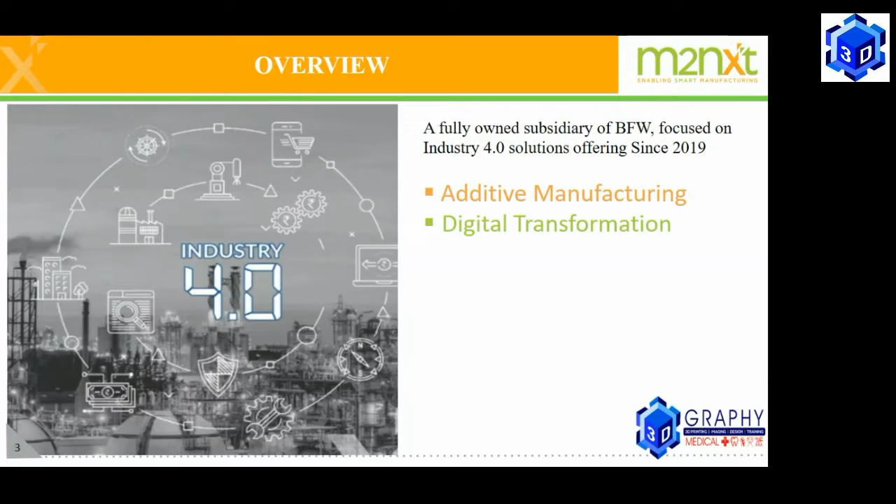At one point we wanted to start offering factory automation products. That is how M2NXT was born, which is Industry 4.0, where we have four verticals. The first vertical is additive manufacturing based on laser-based DED. We also have digital transformation, where we can acquire data and do analytics on every piece of equipment being produced and running on any shop floor. We also do a lot of automation in terms of how equipment runs on the shop floor.

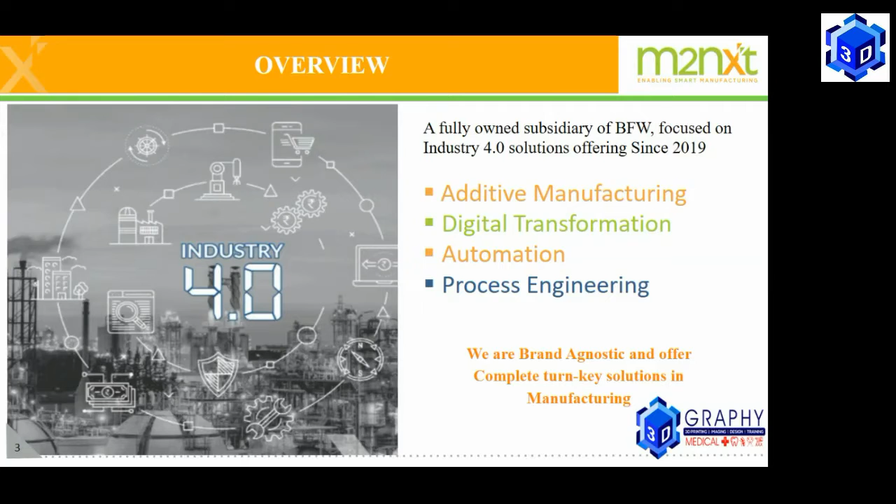We use robots, cobots, and so on. We also do process engineering, which brings better efficiency in terms of how we get the best out of the equipment at the end of the day. We are primarily brand agnostic and offer complete turnkey solutions in manufacturing. That is how the entire journey of M2NXT is going to be.

Now, on the portfolio, I'd like to emphasize two areas. One is AGV automation, which can be a good solution for medical requirements. We're already working on pharmacy and clean room applications. So on the medical domain, we can look at AGV, and particularly on additive, we have hybrid and 3D printing solutions.

In hybrid, you can build the part to the required contour and finish the part without removing it from the machine, which means you can achieve micron-level surface finish along with the contour. This has 5-axis capability, with 3 linear axes and 2 rotary axes, which I'll show you a little later.

Along with that, if there are very crucial contours, we can use robotic additive. We can also use gantry additive, where the voluminous part, which can be as big as 2 meters by 2.6 meters, can be built on a gantry. So this is the brief portfolio.

Now, what is the significance of additive in the medical domain? What can we offer? First, this is a made in India product which we have launched. We look at how it can be made affordable in the country, particularly in the medical domain, and it's used for creation of customized patient-specific prosthetics, inserts and anatomical models, health restorative items and hardware.

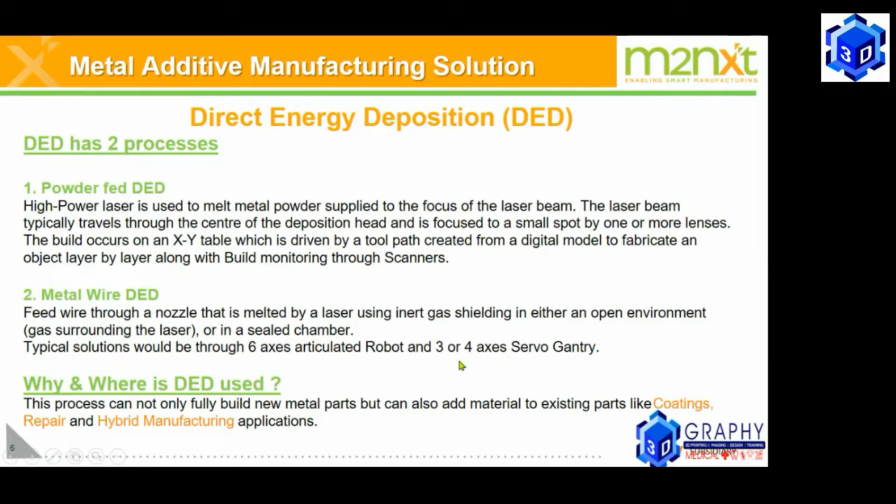So where DED is used is coatings, repair, hybrid manufacturing, and so forth. We can bring both chambers, open chamber and closed chamber, which we can supply along with the equipment, depending upon the quality of the part which needs to be achieved after we build and machine. So it can be an open atmosphere or a closed atmosphere, with a shroud gas which could be good enough to build the part.

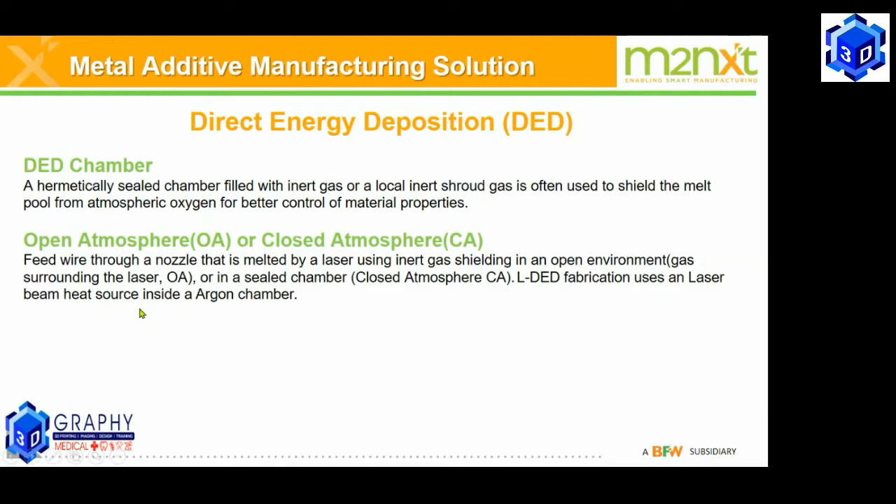Now let us look at the platform called Photon H series, which we have launched and which is up and running in our technology center here in Bangalore at BFW. This comes with an additive and a subtractive capability. As you can see on your right, when you are building the part, the head comes down and the part starts getting built on the table.

Once this part gets completed, you can see the subtractive spindle next to the part with a center distance, where the offset is automatically taken by the machine, and the CNC will take over the machining of the part. This means you build the part and complete it with machining on the same table. The entire system has the CNC controller on the right and the additive control on the left.

The building and machining is seamless, which means we use a post processor and a CAM model, we get the STL file, we build the part, and with suitable offsets of the tool, the tool changer automatically selects the tool and then machines the part.

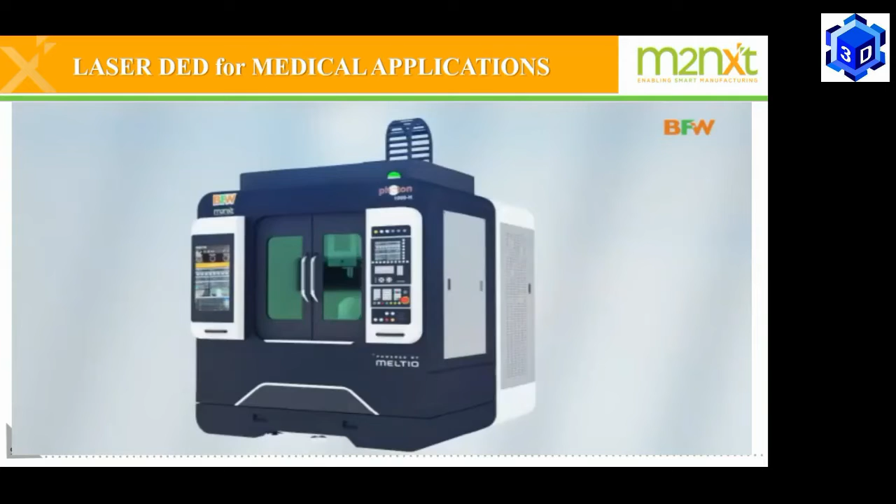So just to get a better view of the product, I will run a video which gives an exploded view to show how the machine looks. This is how the complete machine looks, good to go on any shop floor or laboratory. It's an industrial level machine with laser safety glass in the front, and you can see the VMC with 5 axis, with 2 rotary tables and 3 linear axis.

Depending upon the contour and the volume, you could build the part by programming on a post processor.

This is the laser head which comes down when it wants to do an additive process, then goes back, and the same table moves towards the mechanical spindle, which can machine and finish the component. On the right you see the CNC controller, and on the left you see the additive controller.

Here you could build the part based on any contour required, finish the part and take it out, and go to any platform depending upon the requirement. The 1000 platform gives you something like a 400 by 300 by 300 kind of volume, which is good enough for medical implants.

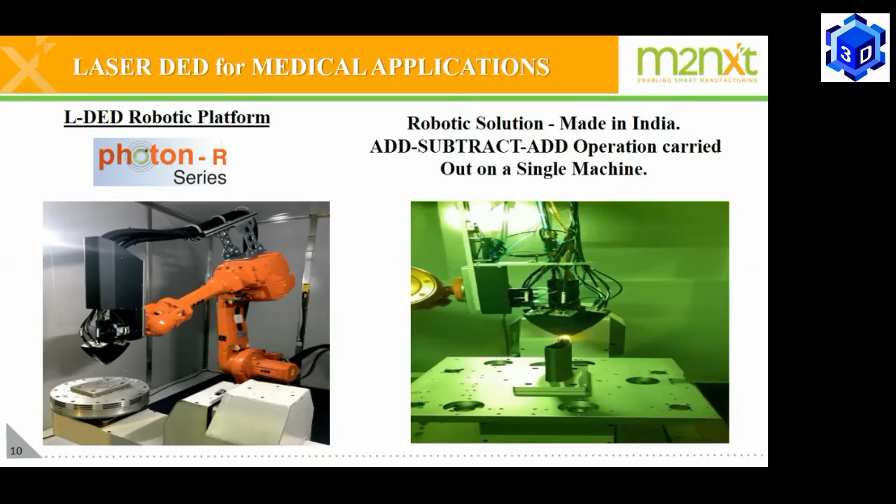Now, various parts which can be printed using the application - I will not get into the details - but typically the jaw implant, the surgical guides, the femoral stem, the skull cranial, hip cups, leg prosthetics and so on can be achieved using this particular platform which I just showed you.

Primarily, it is customization and personalization with superior finish. This is something which, on a single setup, without the intervention of anybody after you build the part, is the advantage. Optimal cost efficiency, because we are building the machine here with the complete post process, including the CAM model software. Enhanced productivity with versatile finishing capability, democratization and collaboration, wide variety of materials.

You can go in for a combination of wire and powder to enhance adaptation of DED technology, which means the wire is chosen when you want a very fast build rate. Imagine you want to build a part within 1 or 2 hours, the wire would be the right thing to do. And when you want a fine contour of the part, powder would be used. So the combination of both gives you accuracy as well as speed in terms of the platform.

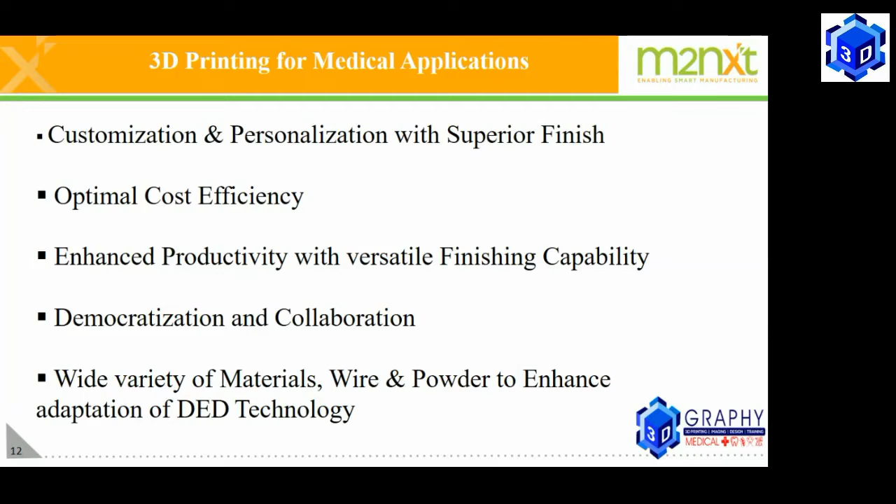And the hybrid would enable you to go and finish the part and be ready with respect to the implant, which would be the required thing for the patient.

Typical applications of LDED in medical are most commonly patient-specific orthopedic implants, patient-specific surgical guides, mini plates for free flap fixation, customized prosthetics, and coating on top of implants to enhance application and life of patient.

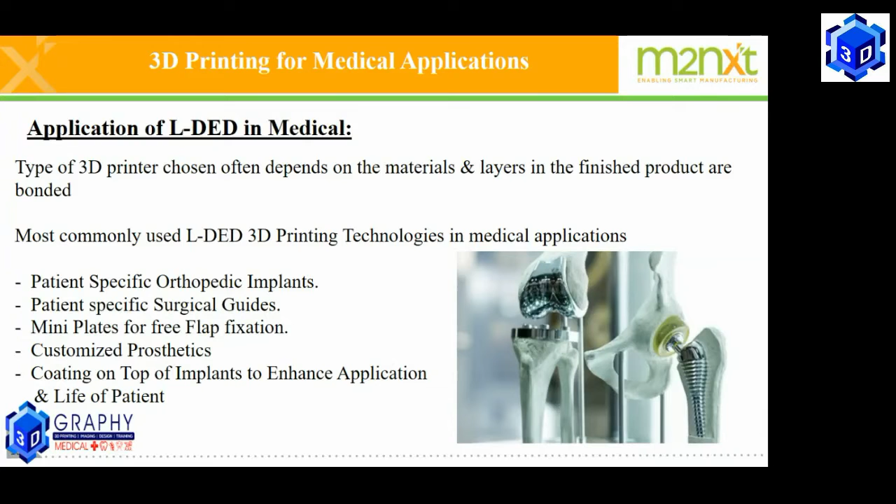We also have a coating capability where we can use a third nozzle on the machine itself, where instead of doing an additive, you can do a fine spray coating of the powder, which would bring in the longevity of the implant itself because of surface coating.

Finally, looking ahead, the most advanced 3D printing solution is anticipated for complex implants. In situ printing, in which implants are printed just before surgery, is anticipated as a future trend, where a patient would require quick attention because of various issues, where the surgery has to happen instantaneously, and a patient-specific implant can be printed at site.

This will advance to use for in situ repair of partially damaged, diseased, and fractured bones. This is also a possibility we are looking at.

So finally, I want to conclude that LDED additive solutions can realize implants to the finest contour with a versatile metal range, starting from stainless steel to titanium to chromium cobalt to vanadium, and so on, to suit every need from scan to implant, so that the surgeon or domain expert needs to do what he needs to do, while we try to support entirely from the local capability and see how much we can come closer to the orthopedic requirement.

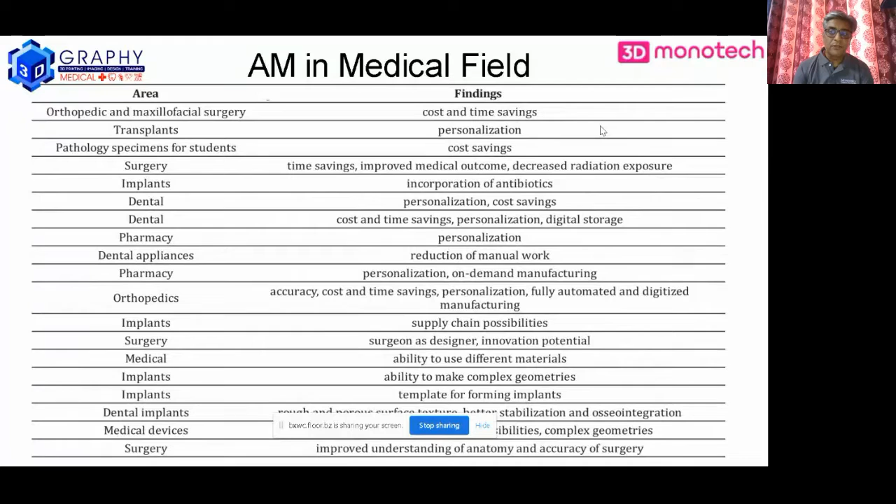This is what we are talking about today, more about orthopedics, how it can help, how additive manufacturing can help in all this. You can see we are only talking about a few areas like implants, which is mostly to do with metals. But there are also other technologies which can be used by doctors in the medical field for the favor of the industry and for themselves.

Some various basic applications in orthopedics we can talk about are testing and planning, where we can speed up the process in developing new devices, and also create some sort of models which can be used for better surgeries. We can also talk about implants and devices, which has been the main discussion throughout the last 2 days.

Talking about testing and planning, this is very important, because before even the planning of the surgery, if it's a very critical surgery, today with the digitization available, with the type of DICOM to print software available in the market, it's easy to digitize and convert patient-specific medical data into a digital 3D model, plan it properly, design it to the requirement of the patient, and manufacture it.

This is where additive manufacturing is very important for customized solutions, and inspection. You can put models through 3D systems, through intensive quality control systems, and deliver a final product.

Models, guides, or implants - the various technologies used for testing and planning could be right from the software. If you talk about hardware and 3D printing, we talk about metals, but there are many non-metal products useful for basic planning.

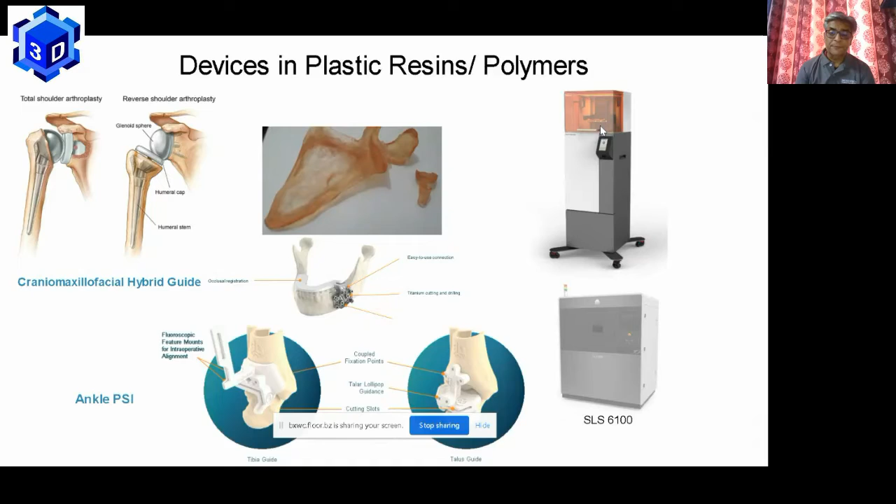Going forward, also with SLA technology, which is stereolithography technology, we can see that there are a lot of devices which can be printed with very good accuracy and finish, which can be part of the initial surgical planning and surgeries as well.

And then devices in metals, of course. When we talk about metals, it's very well known that titanium and stainless steel are being used for devices and shoulder implants, interbody fusion cages with inserters, and various hip implants.

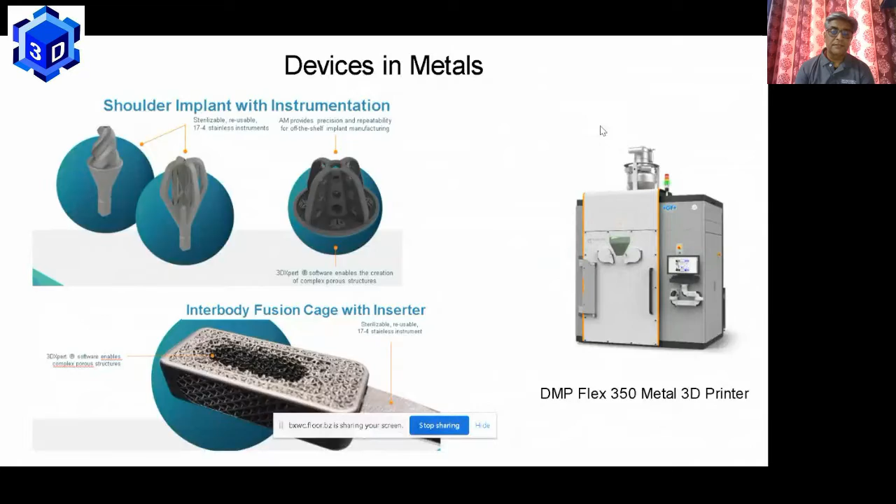There are a lot of materials available today with powder bed technology and also DED technology, which are really revolutionizing devices in the industry. And we talk about implants in metals - there is a whole lot of possibilities with 3D printing and metal 3D printers.

This is basically something which we can do with powder bed fusion, direct metal printing technology, where you can integrate a lot of details for osseointegration and for very, very minute parts.

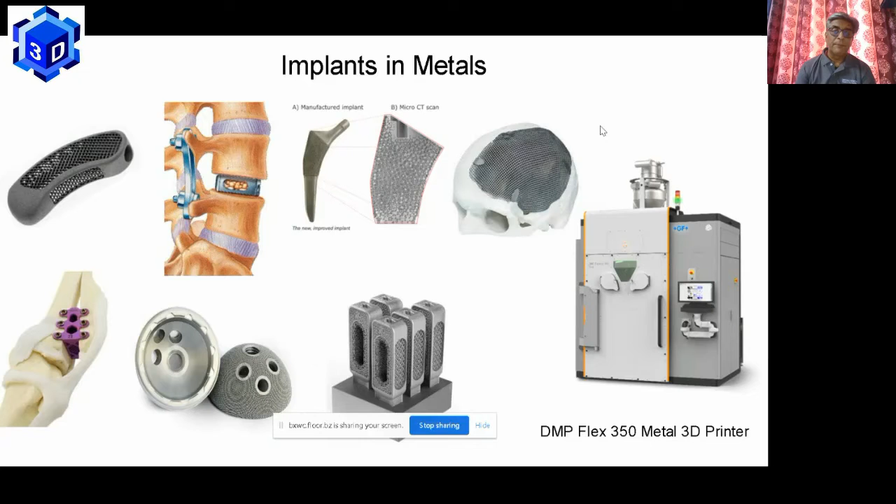For implants and devices, we always talk about metals, but there are also technologies utilizing ceramics and wax. Wax is also one of the important parts of medical manufacturing which we do not see, where it is going to be very low cost for certain surgical devices to be manufactured.

We also have wax 3D printing, through which a few components can be easily made out for investment casting. You do not have to go for molds or tools, which means it's toolless digital manufacturing using wax.

And then we talk about ceramics, which is a recent addition to our portfolio, and it's very important to consider this because this is going to be the future in terms of devices and implants.

And it is used as a probe to target cancer cells. This has been used for breast cancer surgery, manufactured using the XJet ceramic technology. This is one of the most recent technologies which uses nanoparticles instead of micron-level particles, and it can provide the minutest parts for surgical support.

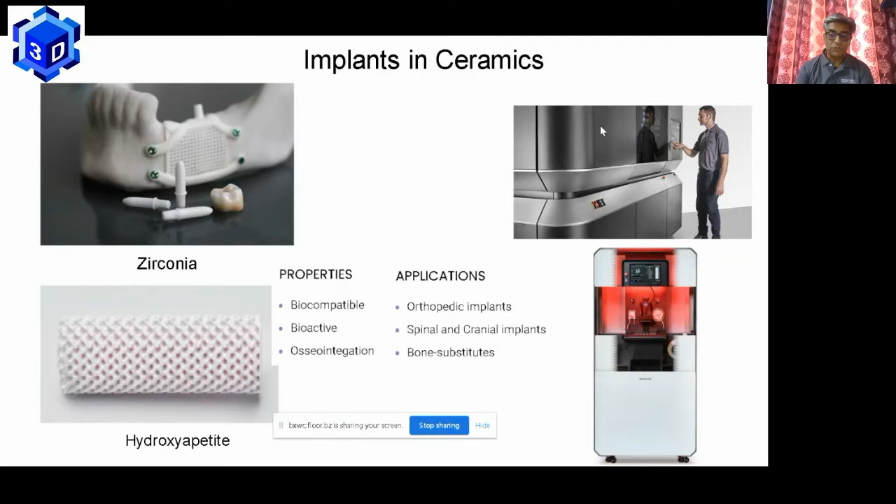Then we talk about implants in ceramics, which with zirconia and hydroxyapatite is being widely utilized today. Hydroxyapatite is also being developed through DLP technology for future implants. Zirconia is used right now for dental applications, but will also get into orthopedics in the future. With this, I would like to show you two videos on ceramic applications, showing how this future is going to be with implants.

Trying to diagnose and deal with breast cancer. In the U.S. alone, 41,000 women will die this year of breast cancer, and 500,000 will die worldwide. This despite advances in 3D mammography and other technologies. In the U.S. alone, 1 in 8 women will be diagnosed with breast cancer in their lifetime.

Back in 2002, Marvel Medtech recognized the potential value of MRI for detecting and treating breast cancer. However, as we got into this, we realized there was even more potential value—the idea of using MRI to detect early stage, dangerous cancers that need to be found early and treated is groundbreaking. Realizing that MRI could guide minimally invasive treatment procedures, we needed to develop an MRI-compatible tool, for example a cryotherapy probe that could be used inside the bore of the scanner while doing imaging to guide it.

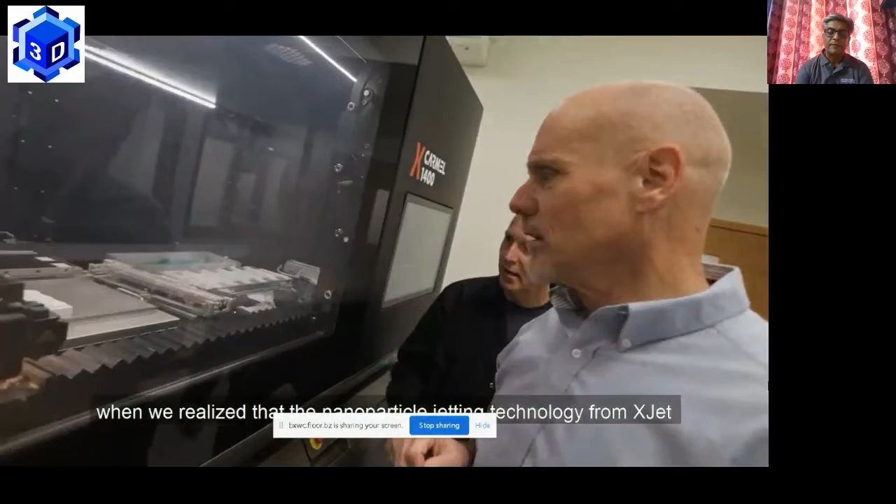A real breakthrough came when we realized that the nanoparticle jetting technology from XJet could meet our requirements for the fine, intricate details needed to make this MRI-compatible cryotherapy device. The XJet system offers freedom of design that allows us to produce this very complex part, as well as many others, with unparalleled ease of use. It's very efficient and environmentally friendly. It produces final parts that don't need any post-processing. The cleaning process is very easy and fast. It's now used for production parts that are ready to use, not just prototypes.

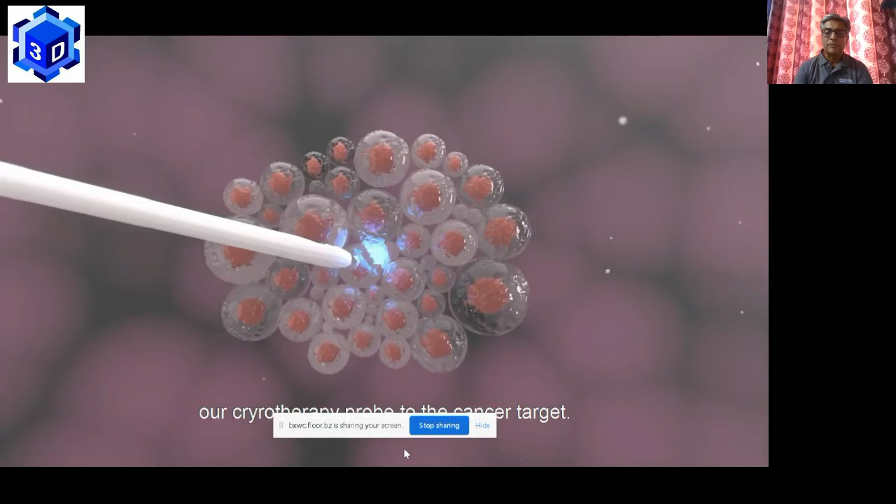So we use our image guidance system to guide our cryotherapy probe to the cancer target. We then apply the cryoablation technique that will freeze the breast cancer tumor, and we're done. We leave the tumor there after it's been destroyed, and the immune system cleans it up. Through this process, the immune system can actually generate antibodies that can prevent the cancer from coming back. This will transform breast cancer healthcare completely by eliminating the need for many biopsies, surgery, chemotherapy, and radiation treatment.

Our solution, combined with XJet's production technology, will be the new paradigm. This will allow us to offer groundbreaking treatment not only to patients in large hospitals, but also to those in community-based smaller hospitals. Our goal and vision is one day for women to go for an annual MRI screening, and if something suspicious is found, to be able to treat it preemptively. What enables this vision to work is the system from XJet, which allows us to produce the right probes that work in an MRI environment to treat these women and save lives.

Despite millions of dollars being spent on research trying to diagnose and deal with breast cancer, in the U.S. alone, 41,000 women were...

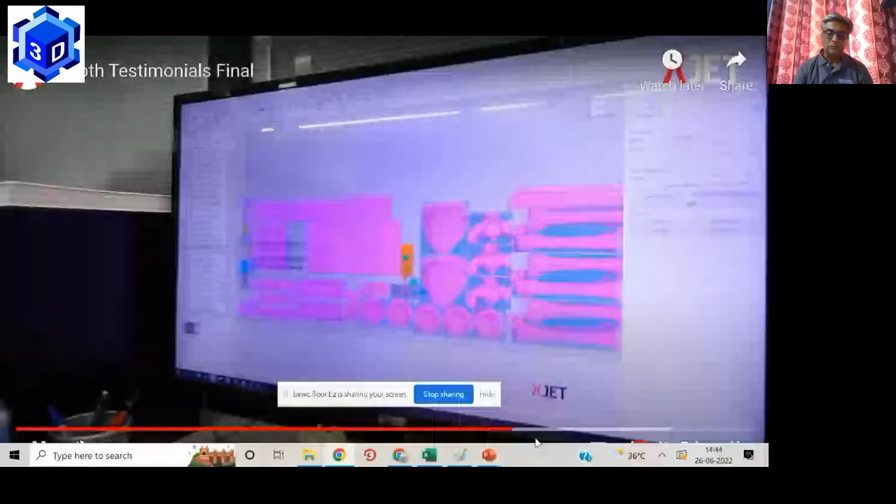About the parts, what we really like is the beauty resolution, the capability of doing a very complex geometry, small holes, very sharp corners, very refined surface finishes that you can basically make a part that's right off the printer, doesn't need any post-processing, and is ready to use, ready for the final use, ready to go in the field and be a valuable part of the customer.

Now, not only can you make it, now you can mass produce it. With our system, you can do your product development on the exact same equipment that you're going to go into production with, and it drastically reduces product development timelines and time to market. We want to be...

This company, Azot, is actually using the XJet technology for making parts for the Da Vinci robotic surgical instruments. This technology is being utilized very widely across the world. It uses nanoparticle jetting technology, and this is one of the futures for the industry, with very micro and small surgical parts and surgical devices using ceramic and metals.

So I would like to close with a few slides about us. We are basically a 23-year-old company, established in 1999 with 400 employees. Today we have 15 plus locations with 10 own brands, and we are also into the development of 3D printers.

Apart from our 2D printing capabilities, we have 27 alliance brands, out of which 9 are 3D printing technologies, all the leading technologies we have. We have 2 manufacturing facilities in Chennai and 1 in Delhi, and we have locations all over India to support our customers.

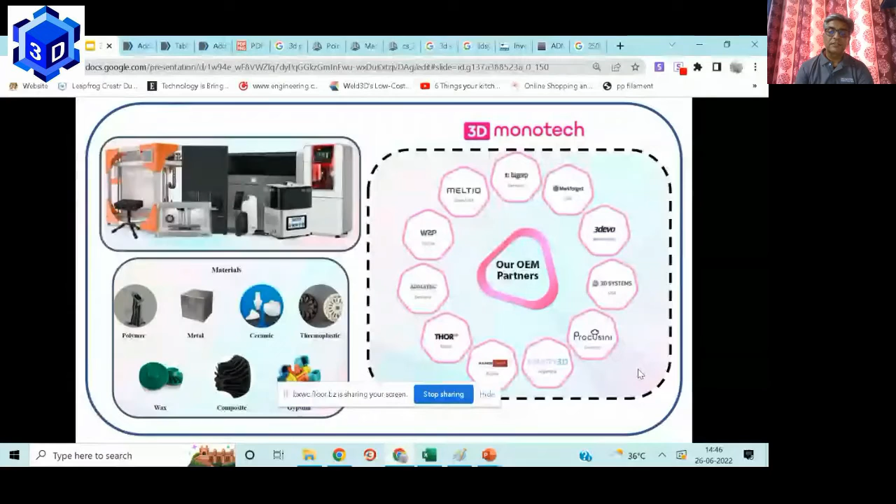Our partnership in 3D printing is with all the giants of the world with respect to technology, from scanning to printing of various materials, including wax, polymers, metals, and ceramics. So what we say is that we are not specialists in medical, but we have the technologies and at least the know-how to understand which technology can go for which application in the medical industry, and we are able to provide customized solutions which can help the medical industry.

I would like to conclude by saying that we are helping the medical industry choose the technology with respect to what applications they are looking at, and whether they have to go for print services or buy the 3D printers. So we give a complete consultation. And with 3D printing, we also work on the design flexibility and the economics of printing with respect to the applications.

The value drivers are we reduce manufacturing costs using additive manufacturing, with faster time to market and improved manufacturing and supply chain. We have around 19 technologies in our facility in Chennai, and we have the complete set of technologies across all the materials which we could use for the industry.

And we are also catering to the industry as well as the medical industry. I would like to stop here. Thank you very much for giving me this opportunity, and I hope these technologies could be utilized by the medical industry. Thank you very much.

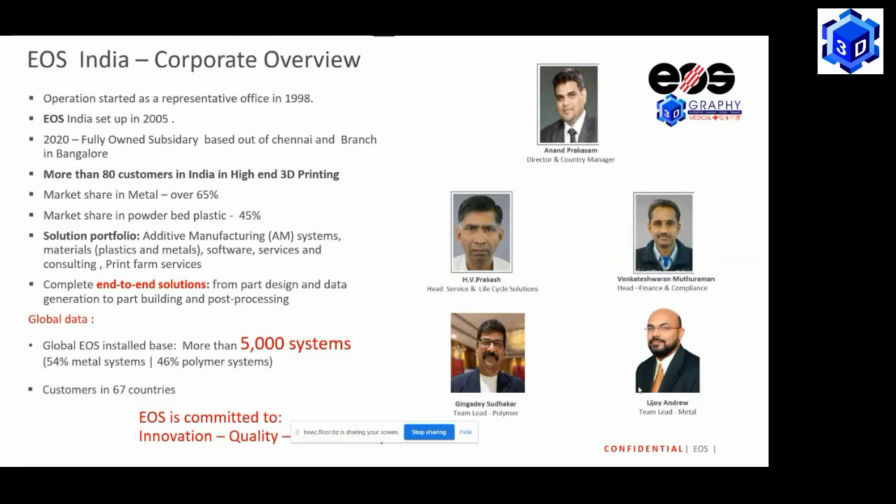So I'll tell you why I'm talking about that - it's called an end-to-end solution, in the later part of my slides. I'm going to talk more about the DMLS technology, which is called the direct metal laser sintering process, or the laser solidification process. It is a powder-based technology. EOS technology is basically only on powders. We don't do anything other than powder-based.

So how does it work? Right from a powder, you get the parts printed, and then you get the final product. You get the powder from one side, and there's a bed in the center, and on the left hand side you have a collector bin. There's a recoater which moves to your right and left. Once the recoater layers the powder, puts the layer, then you have the laser coming up and solidifies it, and then you get the part.

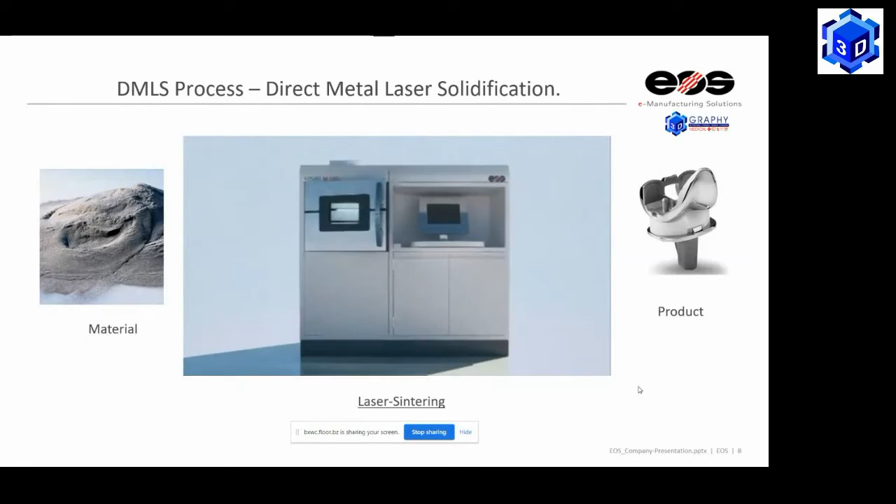I don't want to go too much deep into this, because I think from yesterday people have been talking more on this. So we are more into these areas that we have done. I've personally been working with the medical field from 2015, very closely with the medical field. Prior to that, we were not so much involved or active in this industry, but now we have been actively involved in these areas.

So we have materials. Whenever you have a process, whenever you're in the medical field or in the aerospace areas, the major problems are the materials - what kind of materials need to be used - because it goes into extensive testing and certification. So both fields are more on the testing and certification level. For that you need a very good process, for the materials as well as the process of part building. So here we have materials.

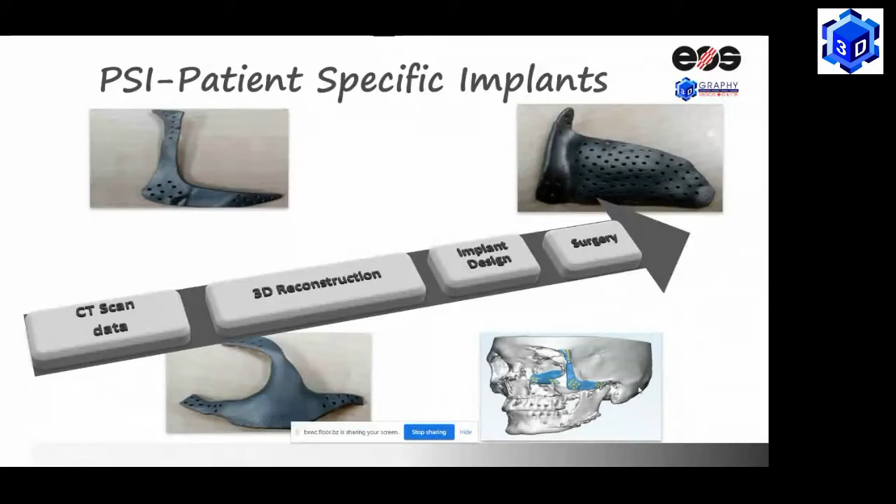On the non-metal side, you have PEEK, PA2200, and PA11, which are both used more on the orthopedic side. I just wanted to show you a few of our PSIs, which I was also a part of, right from the design level to the implanting stage. More on the cranial side, these are a few crania I think you people would have seen a lot of in these areas here. The major advantage here with us is the osteo integration.

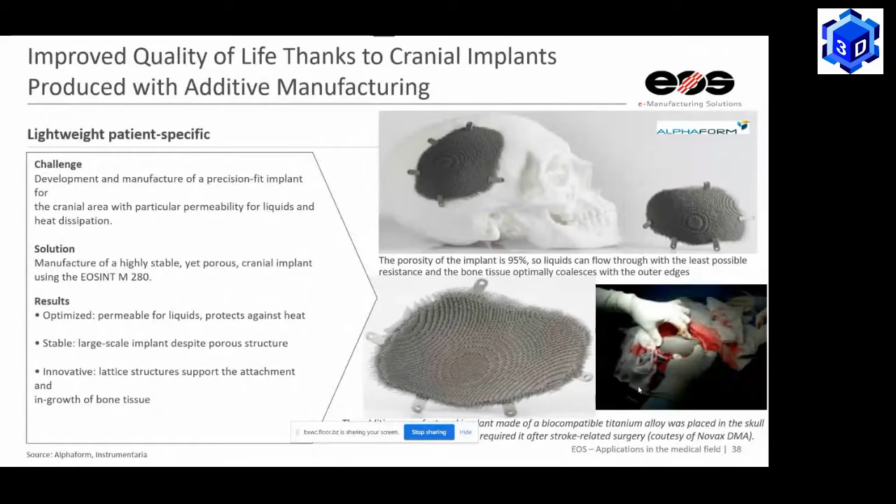For osteo integration, you have software which you can use, where you can control the porosity of these lattice structures. What I meant was, you can see the porosity here - that means you can increase it wherever you have acetabular cups where it's load bearing, or a knee, or wherever you have load bearing. When you do an analysis, you can increase or decrease the porosity so that you can increase the strength, and wherever you don't need the strength, you can increase the porosity.

So what happens is the implant's weight gets reduced, so that the patient doesn't need to carry a huge implant in him. And another advantage here is the osteo integration, which heals - the healing process happens at a faster rate, and also the implant becomes part and parcel of the bone or the place where it has been implanted.

Here and also here you can go up to porosity up to about 70%. Actually, this is about 3 years old work. We have done up to about 95 percentage porosity, but still we are able to withstand the strength and whatever the load bearing conditions that the FE analysis caters to.

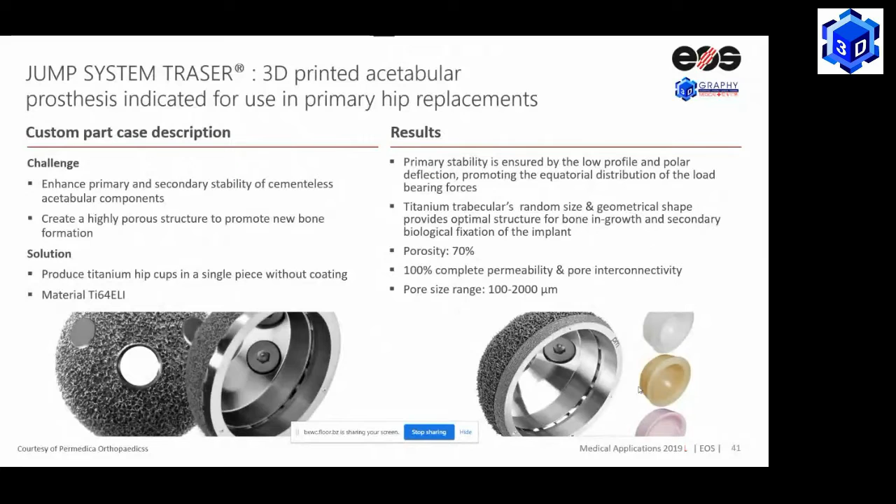And here we have also done with the TMJs. Just wanted to give you some basically what we did. And also on the dental applications, we have something called cobalt chrome, which is a specific material for the dental application. These are a few surgery implants that we did, that I was also a part of. So this was the implant, which is basically a maxillofacial one.

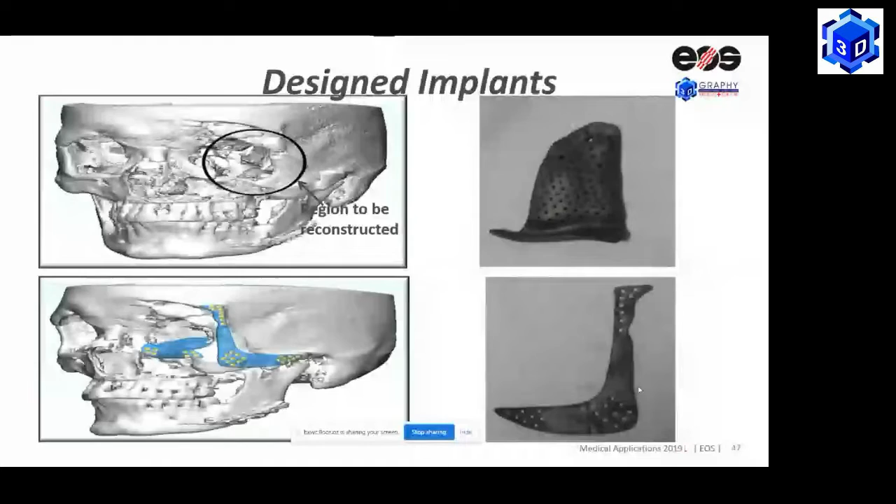So this is again the implant. What we did was, this implant was a bit thick, so we wanted to use some kind of honeycomb structure inside, and then we removed all the powder from inside, and made the implant a bit lighter, so that it is easier for the patient.

And also on the jaw, the mandible basically, you can see this was one way. This is the initial level of our design, but later on we tried to use, instead of these holes, lattice structures where we had it very light, because the problem was the jaw was opening automatically because of the implant. So to make the implant lighter, we used lattice structures over here, so that the patient doesn't have that issue. Here again one more implant, which was based on tobacco use.

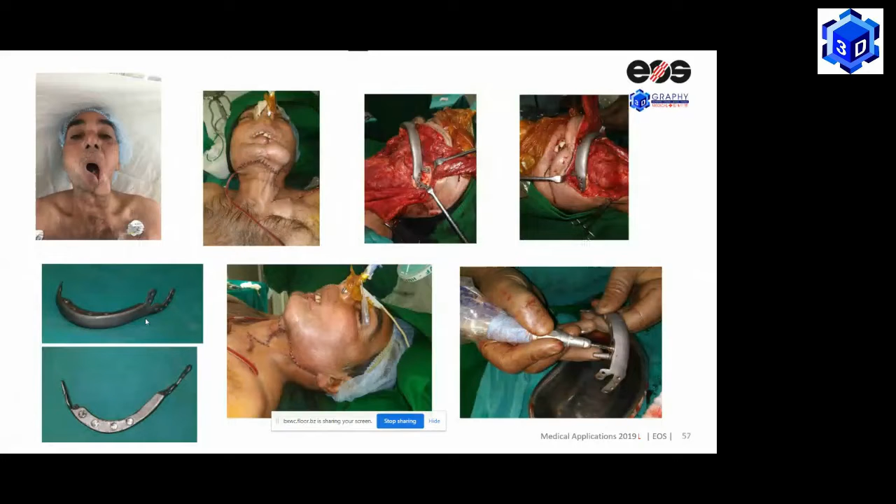The cancer was being found, and then he had to be used with the implant. Not only implants, we can also do direct instruments with the metal machine, so we can directly do some kind of special purpose tools.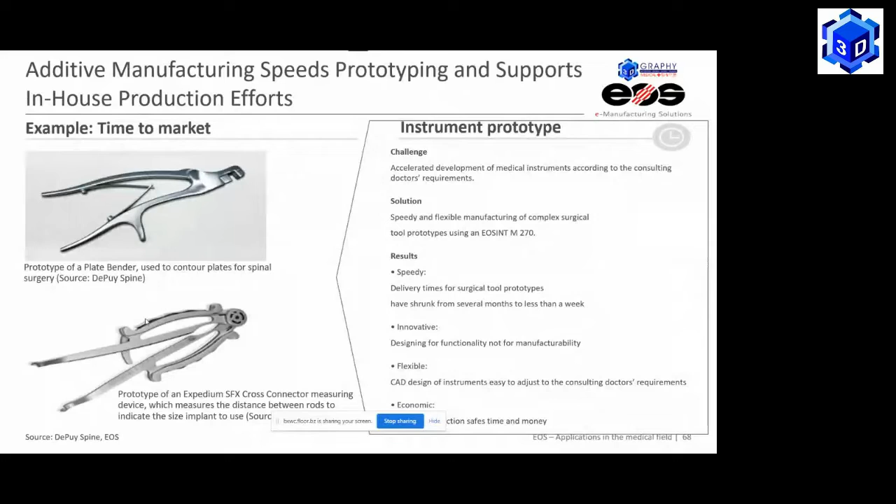Then the second one would be the machine capabilities. That means how during the process, what are the processes that it is taking care of, and how this process is taken based on the certifications that you need to know, or what you have to undergo. Then finally, to do mass production, you need to have, because in metals you have support structures, how do you eliminate those support structures so that you get more output, so that the cost per part comes down. So these are the three things which are very important for a production level on the rapid implants.

So here we do have the materials, and we have a lot of partners who do materials. Basically, we get materials based on our requirement, which is required for the medical industry. Then there are a lot of tests that it undergoes, and then we also do something called inspection certificate, which is widely used for the certificate level for the materials.

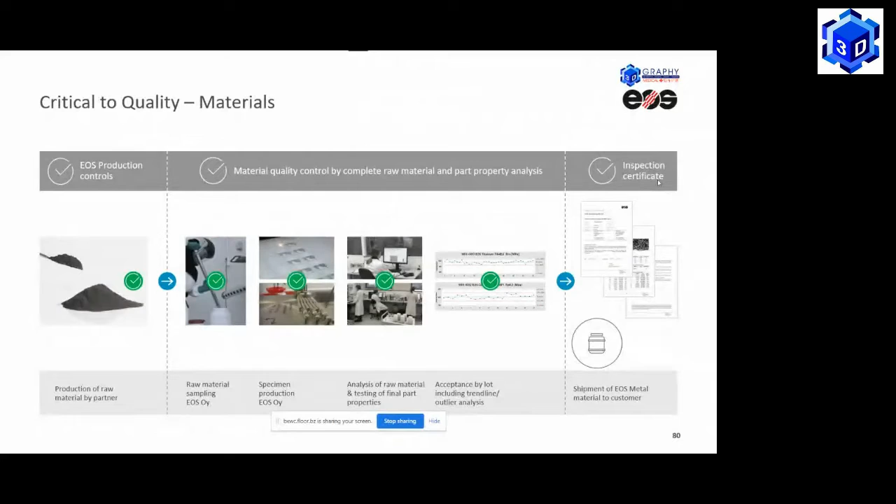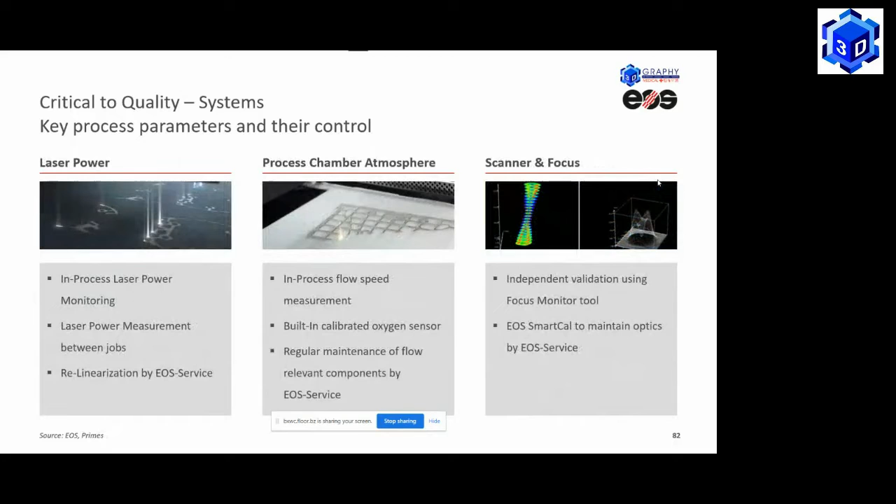So then the system, that means the process - what information do you need inside the process for you to get the certification? These are the details that you can get from the machine as a process document level during the creation of the parts. So be it the laser detail, the process chamber details, the scanning, and then you have the recoating - how good is the recoating - then you also have the axis movements. These are some of the things required at the certification level. All this information is needed for the final certification to be obtained.

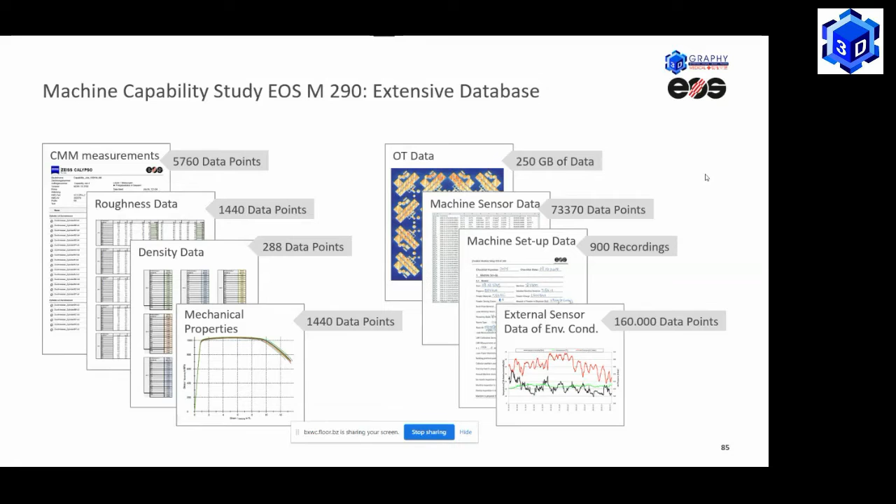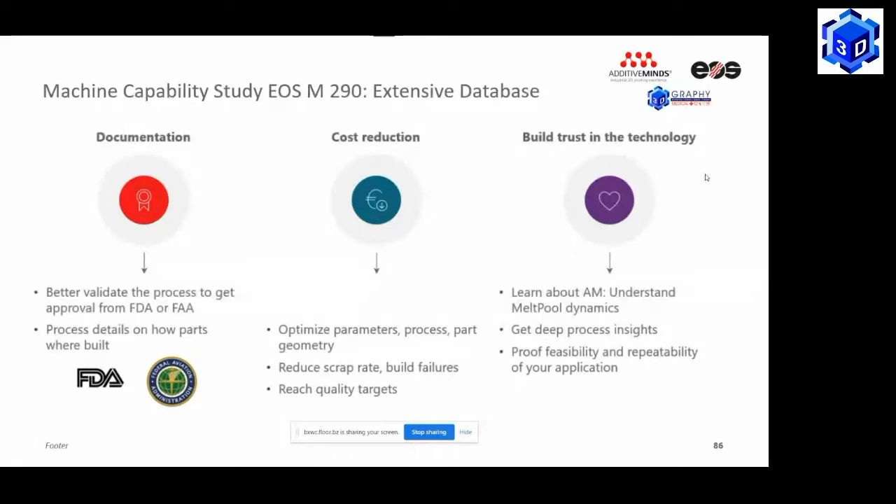So then come to the machine capabilities. We have somewhere around 25 to 30,000 data points that you can take for your certification level. We give data points at every level, right from the material level to the part level. The documentation is basically used for your certification process, which reduces the cost, because if you have to generate all these data points yourself, it is going to cost you. But we have softwares, and we give you these certificates along with the material, so that the cost of your final product would come down.

So how do we do this process? During the part printing, what's happening is we have something called OT, optical tomography, where there is a camera that captures the heat and data of the entire part, and stores it at a place where you can revisit. If you find any issues during or after the process, you can reject the part then and there, so you don't need to do a particular separate test.

Then, when it fails, or when you do a kind of scanning, thermal scanning, or a CT scan, you can see any flaws inside. So all these errors can be caught at the printing level itself, and you can save a lot of time in redoing the entire part.

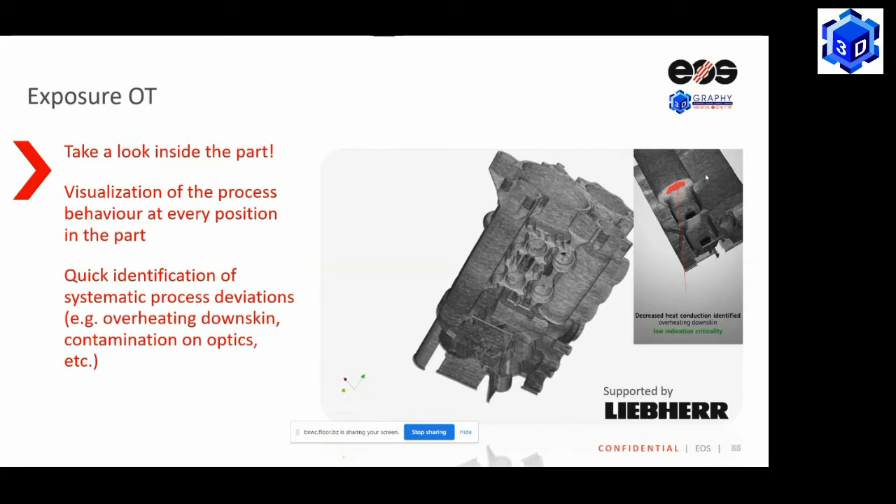And one more thing is this can also be used to tell that this part is fully without any defect, during the process of your certification. So how is this done?

We have three units being used. One is the camera unit which captures, and we have a sensor which also has software, and a separate system installed along with it, which will capture all this data and give you the details live. You can see it while the part is getting printed.

Once a particular layer is finished, it stores all the data, so you can go layer by layer and see how that layer was printed. This way you can get the part porosity or part defects, everything live, as the part is produced.

We also have a lot of monitoring tools, at the powder bed level, and at the melting level, meaning when the laser is melting, what's happening in that area - whether there's overheating or cooling. Whatever it is, it tells you all the information through the melt pool.

With this information from the OT, the optical tomography, you can detect whether the parts or implants you've produced are defective or non-defective. Finally, it gives you a report, which can be customized based on whatever the requirement is for any certification you're going for. Based on that, you can get a report for your certificate.

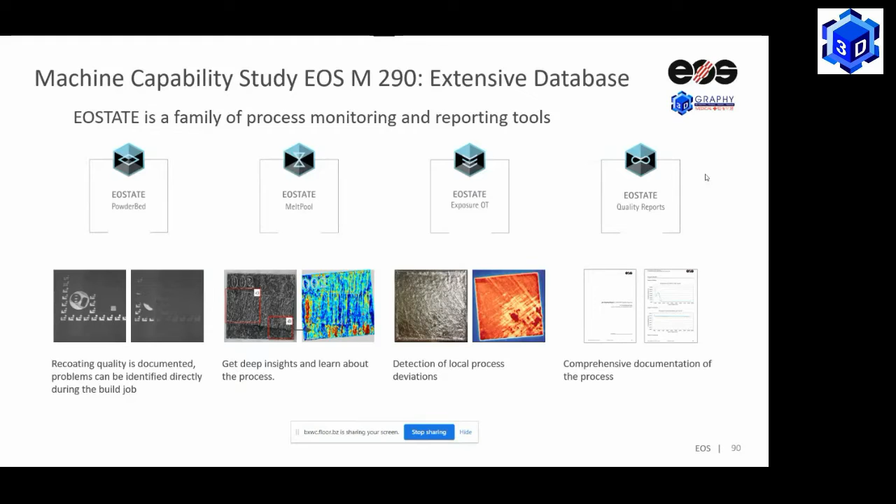It's a comprehensive document with more than 25,000 data points, which you can customize as per your requirement. So this brings us to the quality and also the machine capability.

Now we'll see how you can get the number of parts, because if you have a big volume to produce, how many parts you can print in one single shot is important - and how many parts need no post-processing. So once you build it, you do very little post-processing, and then it can be sent for production.

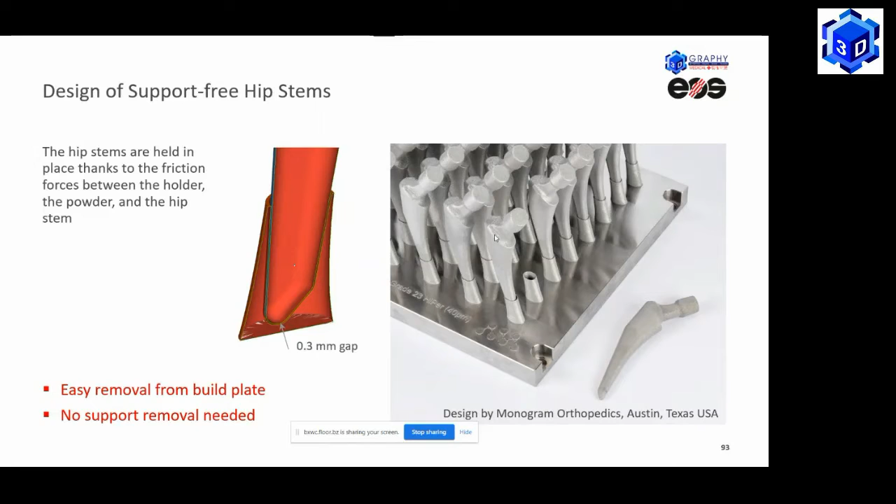That's something called support-free production, which we have. I'll give you one example on the hip stems, where you can see on the right hand side - there's a gap of just 0.3 mm. You can remove it using hand force. You can pluck them like a flower, just pluck it. All these implants can be directly plucked.

So you don't need to do any wire EDM or any special post-processing activities to get your implant off the build plate. It's very easy to remove, and it is support free.

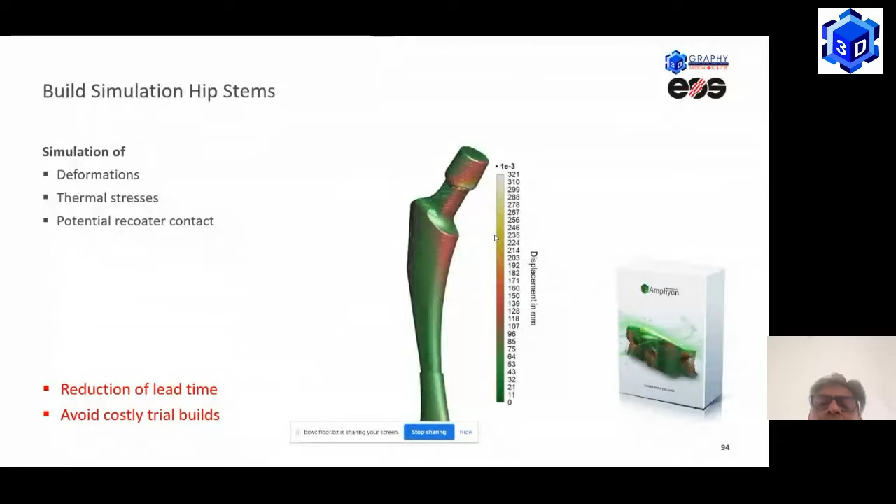So then this is also done - this angle is done. We've done this with software called Amphyon, which is basically used for thermal analysis, to see how deformation is processed.

Then on top of this, you can do testing - a fatigue test. This AM implant is the first implant that has gone through more than 5340 newtons for 10 million cycles, and they found that this is one of the implants where the material performed well on this particular build.

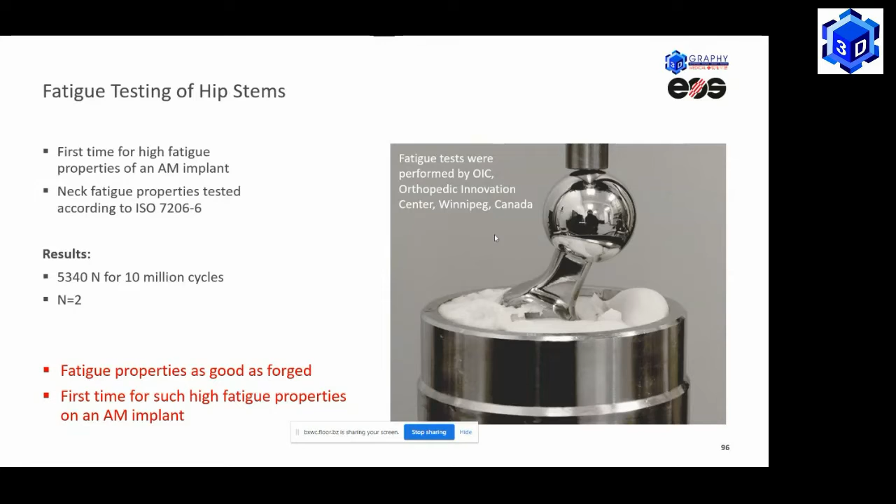So they have taken this - I have a white paper on this. I can share it with you later if you want more details. This is one of the biggest advantages you can have if you are using a hip stem with this particular process.

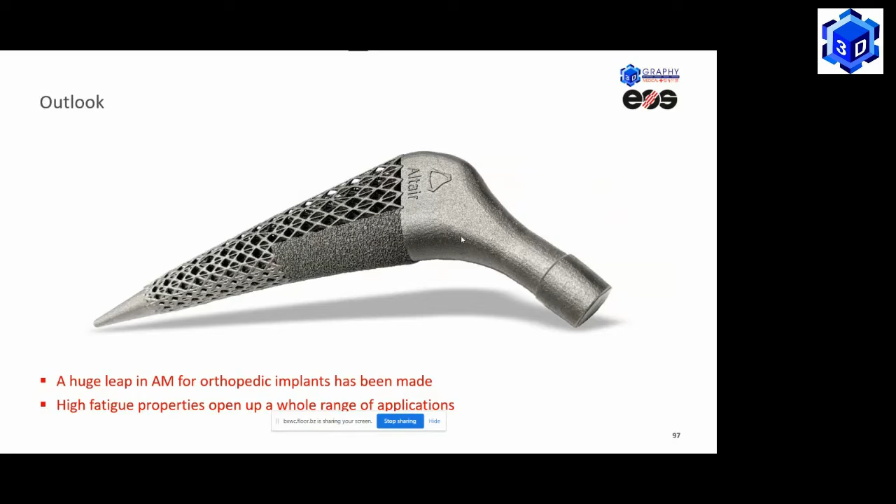You don't need to have a solid one. You can also use lattice structures based on your requirement, so that it can be a lighter implant rather than a heavy one, depending on your load conditions and where you're going to implant the part.

So how is it done? It is done on this system called the EOS M290, which is more reliable. This is basically used, and it is an Industry 4.0 compliant system. We also have one called the 300-4, which is a 4-laser, 4-quadrant system.

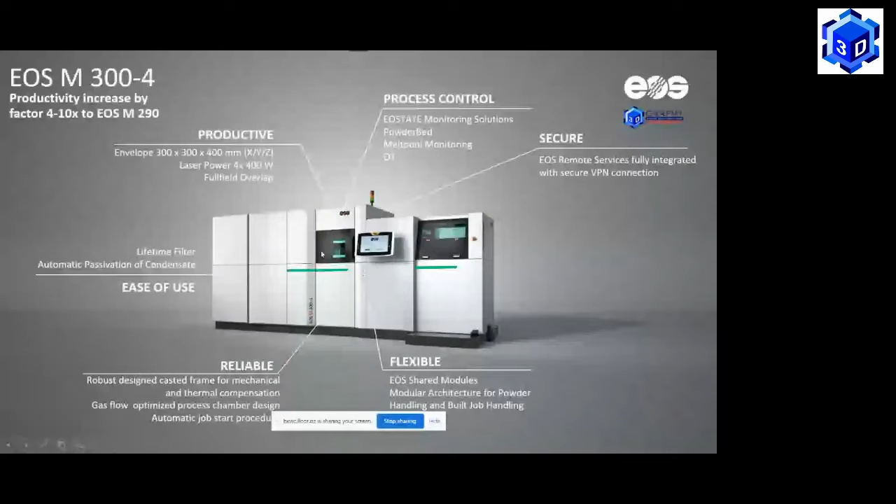This is considered to be a production system, wherein you have modules where you can see these boxes. These are all modules where once you finish your part, you just load another one and start the production. This portion unloads all the parts, removes the powder, and makes the powder ready for the next build. This is the OT, the optical tomography I was talking about. Everything is integrated in one single system, so this can be produced 24/7. The parts can be produced on this.

Just to give you a small idea of how many cups you can produce - here we have different layer thicknesses. Again, this layer thickness plays a very major role in how many parts you get in one single build, and what the fastest time you can achieve is.

On the M290, there are two layer thicknesses: one is 80 micron and one is 60 micron. We are also developing a few more layers where you can get much higher numbers - less hours and a higher number of parts.

So this is on a 60 micron with the same numbers - it's about 9 hours. Here you can see 7 hours.

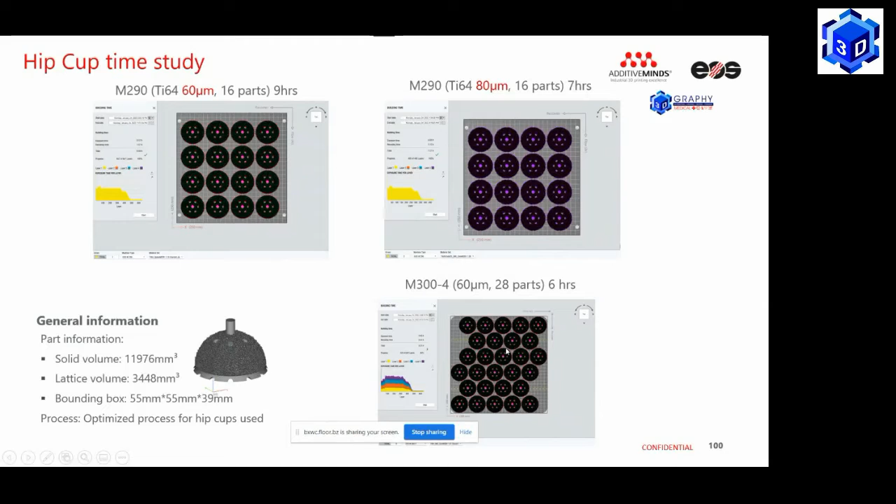So this is still medical or orthotics on the metal side. We also have the polymer side, based on PA11 and PA12 materials. PA11 is a non-splintering material which, when you bend it, can come back and regain its original position.

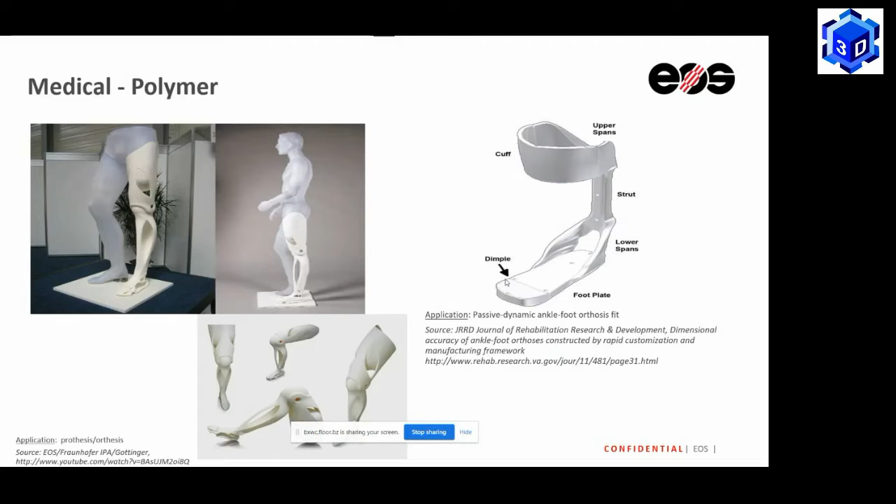We have also done some projects based on knee orthosis, where you can also have electronics involved. And this is on the flat foot, where you can create insoles so that if they have a height difference, you don't need a separate shoe for them - you can use a height variation and then use any shoe.

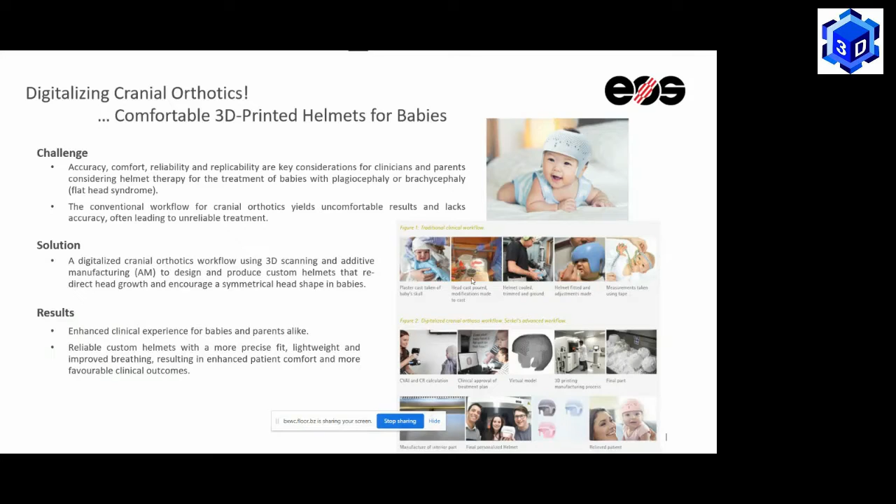Also on cranial orthotics - when you have a deformation on a baby's head, we could see our grannies back in the 80s and 90s, during bath time, putting hot water and shaping the baby's head. But now we have cranial orthotics. Also for TKR, when you have the guides, there are a lot of parts needed during the operation.

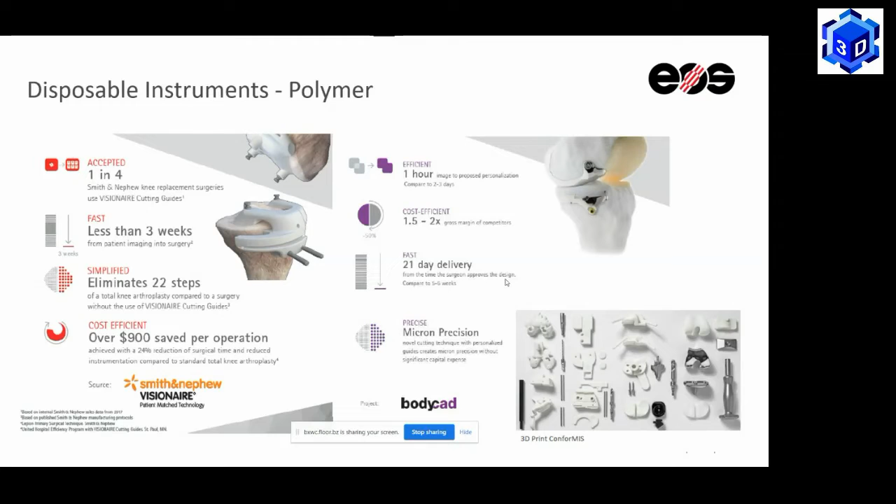All these polymer parts can also be printed. We use SLS, selective laser sintering, which is basically a polymer process where you don't have support structures. This allows us to take care of the entire build, where you can build as a small volume production or a small series production. So this is where we say that we are an end-to-end solution.

It's not that we just give you a machine or the material and then push off. It's our 30 years of experience that we want to share with you. So what we do is identify a particular technology, for example an implant, move that to a business case, and try to see if a redesign is possible, and then produce it at a larger or production scale.

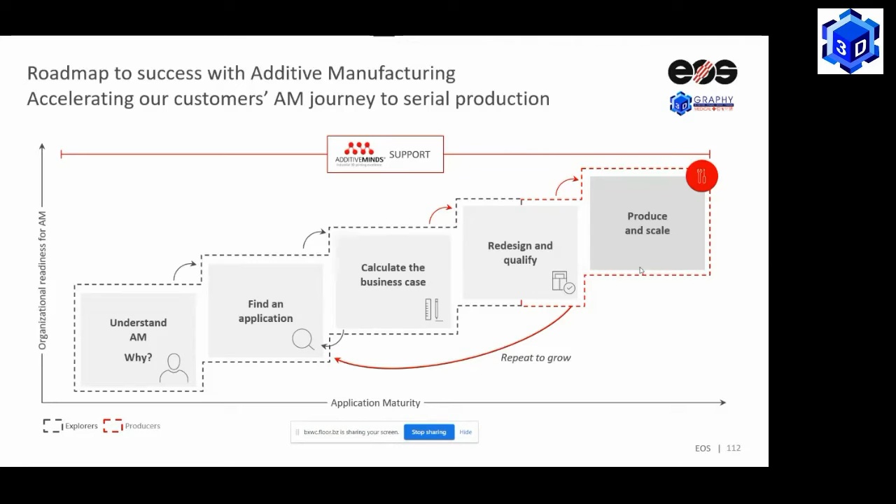So what happens is, from a normal implant, you can take that implant to production level also. We cater to and closely work with you, handholding you in many areas because we have people experienced in various levels, be it post-processing or certifications. We support you with all the documents relevant and needed for your certification process. With this note, we take this opportunity to thank 3D Graphy and everyone for giving this opportunity.

Oh, thank you so much, Mr. Gengadevy. You can call me Sudha. Okay, Sudhakar, this was really a good presentation.

Understanding all these processes from the orthopedic surgeon point of view, we are really surprised that in India, if there are around 60,000 to 70,000 orthopedic surgeons, very few are aware about the technological advancements happening as far as orthopedic implants and the orthotics you are manufacturing are concerned. So we will have a very interesting discussion at the end of the session.

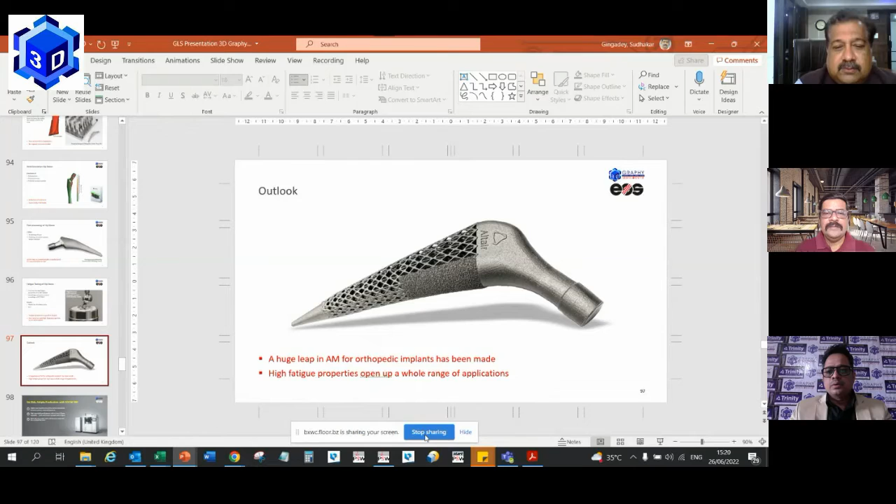One second, let me just share my screen so it is one-to-one. Is this the one that you're talking about, Sushant? Yeah, most probably, I think this was one unique stem which you had presented, and if you see a few slides before that, there was a slide based on simulation studies and load bearing. Actually, this was done in Europe, not in India as of now.

But one of our service bureaus is doing this stem, and currently they are at a certification level. So yes, in India, we are doing this along with one of our service bureaus who's actively doing this femoral stem.

So is there any white paper or study that has happened from that femoral stem? Yeah, I can share that white paper with you. Yes, possible, I can share a white paper on that femoral stem study.

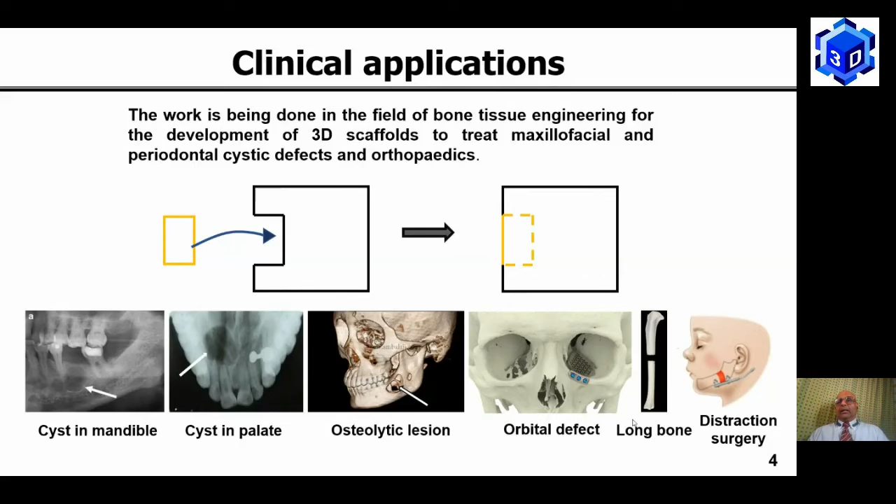So unlike most materials which are 3D printed for surgery planning, these are actual implants which can be put inside the body, and eventually these are resorbable. Some of this work we have begun with in the dental and maxillofacial space, but now long bone is the focus of our interest currently.

So our attempt has been to try and mimic at various size scales the structure. Jumping ahead, what we are trying to do is to mimic the entire chain of structures right from the external shape. So if there is a closed fracture with loss of some part of the bone, you can use either a standard shape, or we'll take a CT scan and customize it. And then we also mimic the cancellous nature, the interconnected nature, down to the trabeculae, and then even to the molecular structure, which is of course collagen in the case of bone.

What we use is gelatin, comes from collagen, and the reason to use that is much simpler, much cheaper, works equally well. In fact, in some in vitro and some early in vivo studies, works just as great without having the problems associated with collagen.

So when we start making these bone scaffolds, numerous properties have to be satisfied, and I won't dwell on these. I mean, essentially we've got to satisfy lots of biological properties, lots of structural features, and we try to mimic as much of them as we can.

The materials that we choose have to be special. We don't use metals in our constructs. However, in using some of these, if it is a highly load-bearing structure, a little bit of metal may be necessary, but the large amount is replaced by polymer and ceramic mixtures, all of which are resorbable, biodegradable.

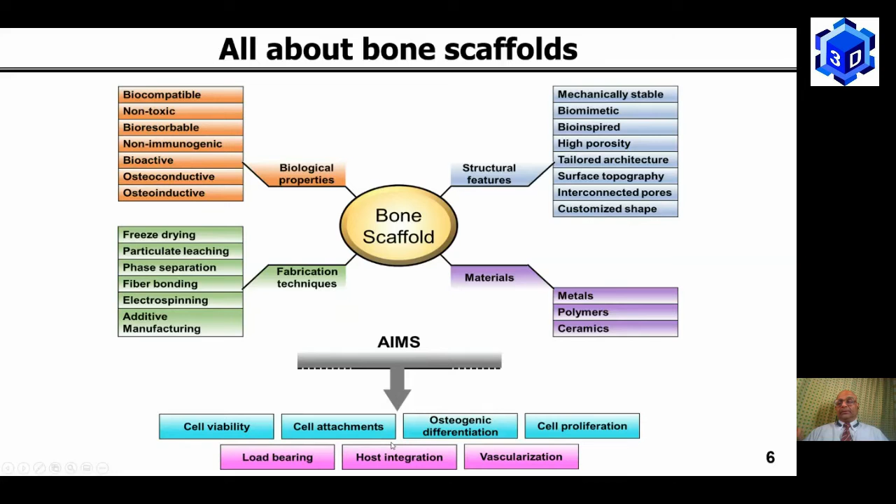So these are some of the properties we try to mimic. These are, of course, well known to you. I won't go through this list, but we do want to have the porous structure, ability to degrade, some amount of strength, customizable shape, osteo conductivity, and perhaps osteoinductivity as well. And controlled degradation, so it just goes away after some time. There's nothing to worry about after a few months.

So the general things that we are looking for in this is to try and make it patient specific. If you look at the bigger picture, patient specific is great in certain cases, but you also need some standard shapes so as to be able to provide patient relief immediately. Then one needs to have a porous structure. One also needs to have a graded porosity from the cortical cancellous structure that is needed to mimic the biology as much as possible.

Point number 5 about adding cells. Yes, we have tried a few experiments by adding cells, but then there are a lot of regulatory issues if we try to add biological cells into a scaffold construct. So at the moment, although we are doing it in the lab, we are not promoting this for patient use at the moment, but surely this will change as the regulatory scenario improves.

What we find is that our constructs are extremely osteoconductive, even a bit osteoinductive. Therefore, they don't need this cell construct. Some degree of load bearing versus the biodegradable nature.

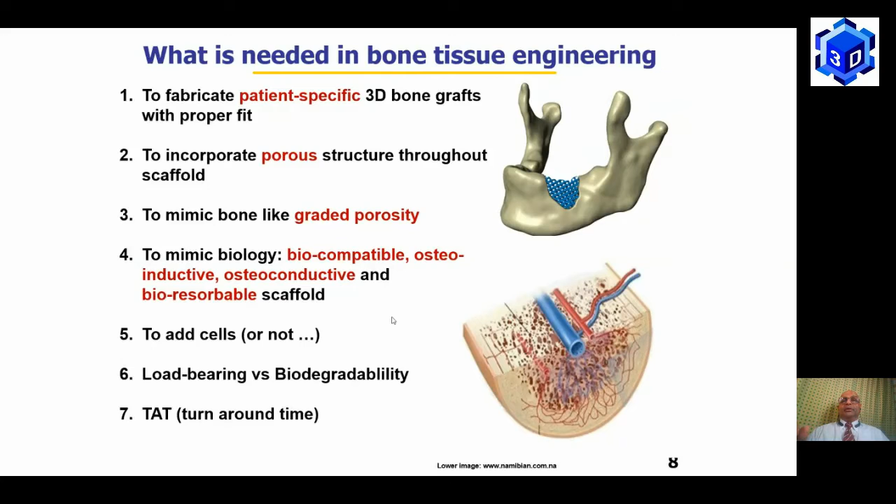And lastly, how fast for a custom made one, how fast a turnaround can be provided so as to be able to do the surgery as soon as possible.

Based on this, we have developed several such products, materials as well as products. These are all new materials, and that is a benefit in some sense, and a disadvantage in another sense. The disadvantage is it has to go through a very rigorous regulatory procedure through drug controller, CDSCO, and so on. We've crossed some hurdles there, and I'll get to that in a moment.

So the products that we have are a sponge. It's like a gel foam, except that it is highly osteoinductive, and this is a nanocomposite structure. It has the trabecular-like structure. It can be like a sponge, stuffed into the narrow neck of a bigger opening which may be underneath, and it promotes bone growth. There is some micro CT data which I'll explain in a subsequent slide.

We then also make bioresorbable screws. These are screws made out of a special blend of magnesium oxide and silk fibroin, useful particularly in sports medicine for ACL repair and so on. These are now undergoing preclinical trials. The bone graft has already undergone first in human trials, and I'll mention a little more about it in later slides.

And then we combine some of these technologies to produce these 3D printed scaffolds. Here is a little piece that we have made to mimic part of the jaw that's going to be excised in a cancer patient.

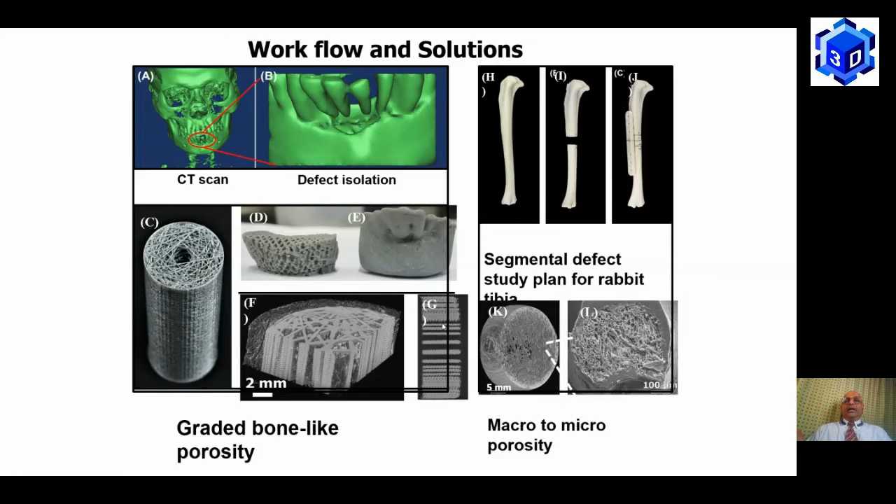So these are totally biodegradable material, with limited amount of load bearing. At the moment we will need a small plate to maintain it, but it will cause the gap to get filled very quickly. The performance of this is proven by this sponge material which we now have, and the same sponge material fills the gap in the hard tissue, in the hard scaffold I showed you in the previous slide.

So this particular spongy scaffold, a bone void filler, has undergone first in human trials. It's approved now as a pilot study, and it shows what happens. And this is a rabbit study which we had submitted to the drug controller for approval.

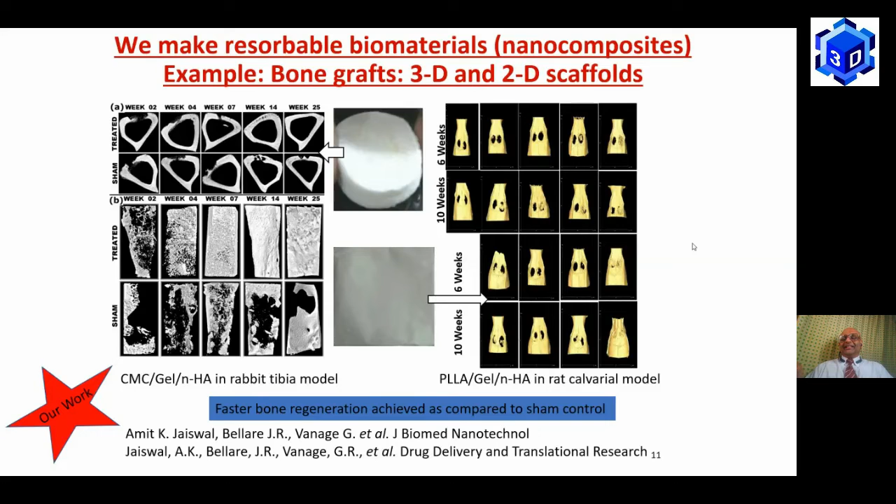So first in human is over. The pilot study is very successful. The surgeon is happy with this, and now we are trying to get permission to take this ahead. As you know, it's like a new drug application. It requires some time, lots of money, a lot of persuasion, and you've heard about problems with getting some of these approvals done quickly in the very last week. So these are things that we are currently struggling with.

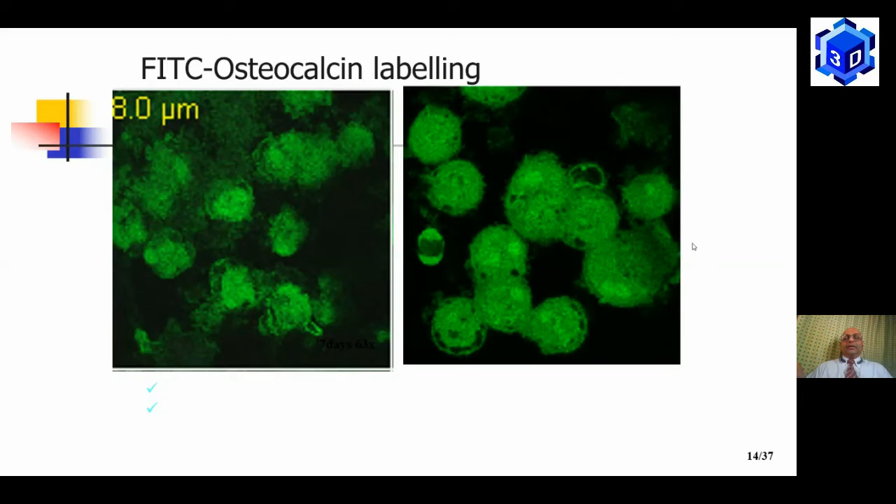So this micro CT data really has been the clinching evidence, which tells that we get very fast mineralization. These are resorbable, and they are safe. And then on the biology side, we do all these studies to ensure that there is a good cell attachment, so integration with existing bone is there. There is good activation for mineralization through these osteocalcin labeling studies.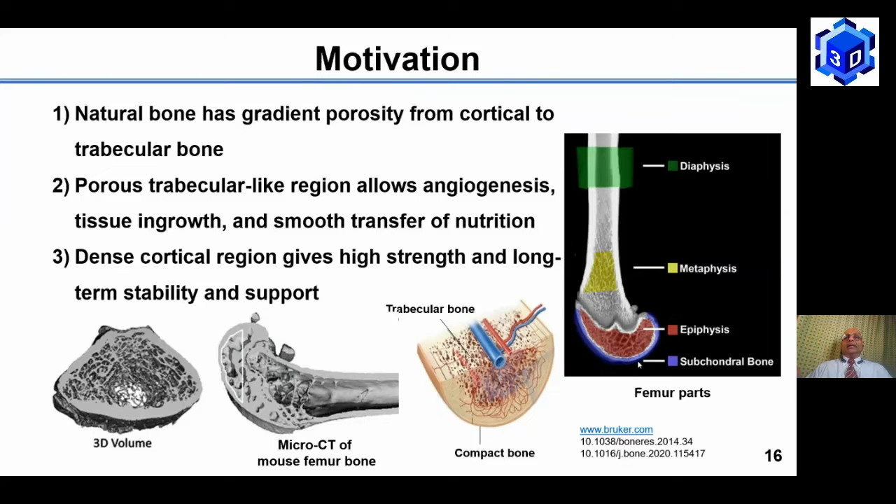And therefore now what we are doing is to mimic this entire nature of going from a dense bone to a hollow bone by building constructs of this sort, not only standard shapes such as this cylinder here, but even odd shapes like this. So we try to make this natural bone gradient from outside to inside, so that it will give strength as well as mimic the natural structure. This is, of course, well known to you all.

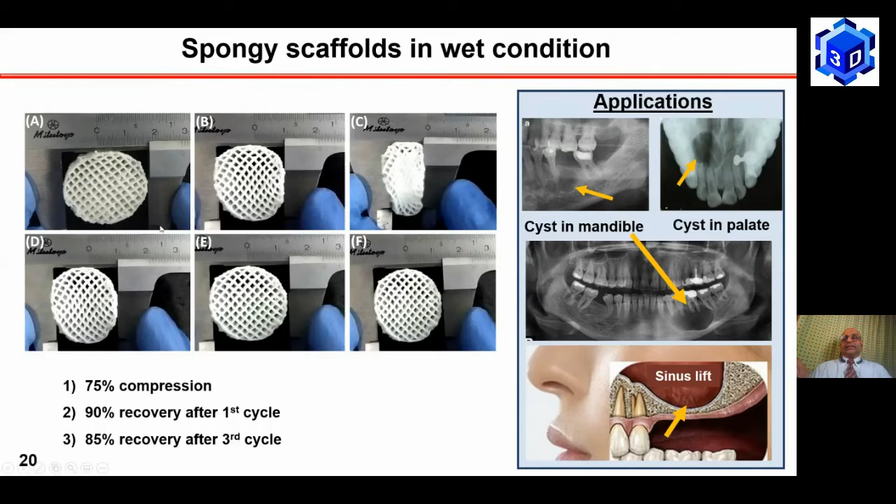So that's what provides this osteoinductive capability, and this entire construct is also spongy. It is flexible, it recovers. It can be compressed and pushed into a closed space, and it will expand and fill out. So that's another added advantage of trying to push it into confined spaces.

Again, we do microscopic studies, and we hope now that we are able to provide some patient-specific 3D printed products. The workflow is already done. We take CT scans in our lab, do the defect isolation, use a computer artist to provide a solution that gets an okay from the surgeon, and then we print it and give it back. So the workflow is there.

We are, of course, waiting now for approvals. The whole slew of drug controller approvals, by virtue of the materials being new, the combinations being new, and the technique also being new, everybody is wary about this, and naturally so. We want to ensure that it's safe. But our first in human trials at AIIMS show that it indeed is, and this product with its gelatin and other constituents works very well.

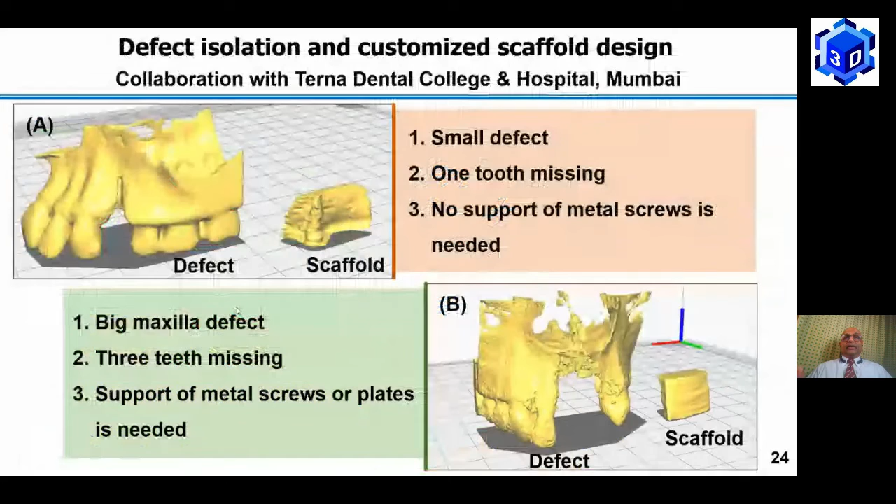Yeah, so that's where we are, and these are some actual patient data that we've tried to look at. So what we've done really, from a technical viewpoint, is we have these new algorithms for the gradient. We are able to make these complex shapes and generate this gradient porosity, and we've proven these in the lab, and in some of our samples we've proven this in human.

We have permission for human trials of a pilot kind, which we've completed. We are now waiting for pivotal. A multi-center trial is what we want to do next, and that's really where we need your help and advice. I would be very grateful if some of you came back to me with a willingness to try this in 10 patients following a typical protocol, particularly for maybe a long bone, either closed or open fracture, where we would like to make this construct either in a standard shape or a customized shape, and see that it works. So let me stop here and hear your comments and advice.

The primary application here, like I said, is as an alternative to animal testing. But we want to go one step further and see how we can get into the clinical aspects of bioprinting as well.

There are many applications of bioprinters as such. Like I told you, tissue engineering is one of them. What Dr. Bellare is also doing is biomaterial studies and research, to understand how the biomaterials and the cells can actually go together in order to form holistic tissues for transplants. That's another application. But this was the promise that 3D bioprinting started off with.

Now there's a long-term vision. Obviously, the holy grail is to see how the technology can be translated into a clinical aspect. But there is a lot of research apart from that can be done using the technology. The technology can impact various sectors.

I'm just going to start with cancer research because it's one of my favorite topics. In cancer, there is so much that we can do. We're understanding the disease year on year, and more innovations and applications are coming out for cancer. Specifically, what bioprinting can do is help us better understand the cancer microenvironment. Yes, it varies from patient to patient, but we can develop certain almost close to standardized models that can be used specifically for this.

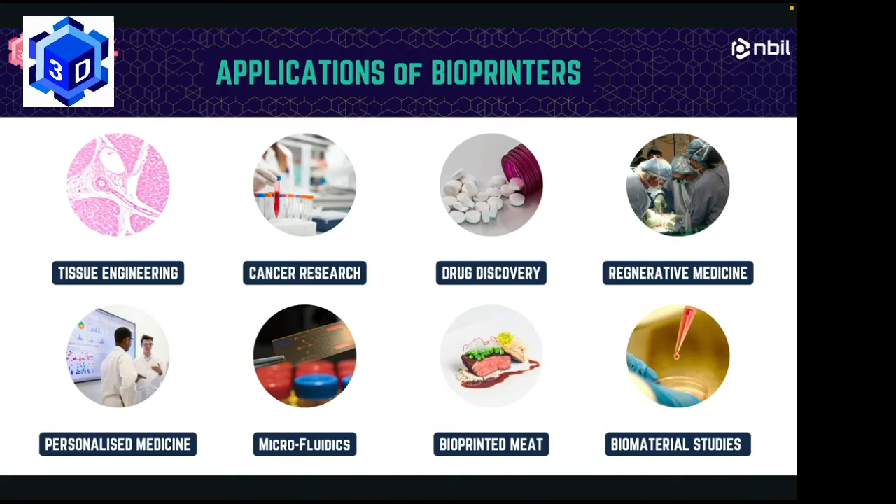The next one, which was very interesting for me, was bioprinted meat, where people are looking at how they can print meat not only for sustainability on Earth, but there's a company in Israel called Aleph Farms that is basically bioprinting meat for space. This is going to be a huge game changer if they're able to do it. But these are some of the applications of the technology. There's a lot more I can delve into, but in the interest of time, I'll move forward.

So we build bioprinters - high-tech 3D bioprinters from the ground up. What you see here is a dual extruder print from one of our Trivima bioprinters that is right now at Central Leather Research Institute in Chennai. As you can see, this is a dual extruder print.

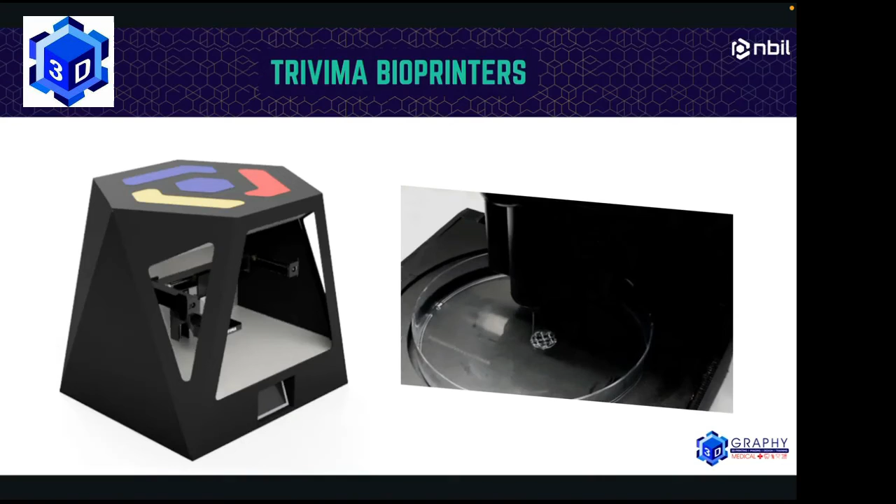You have pneumatic pressure that is specifically controlling the deposition of the liquid on a heated bed. Here, you're printing one layer on top of another, but with two different biomaterials. This is the basic core concept of what 3D bioprinters do, and obviously there are different technologies that allow you to do so.

There is a high level of customization. Obviously, we're working with different kinds of biomaterials and different kinds of cells. So what we did was we wanted to make it easy for researchers.

Initially, in 2016, when we were speaking to a lot of researchers in the space of bioprinting, what we came to understand is that the customization options were minimal, and we were actually planning to buy a commercial 3D bioprinter. But the feedback that was given to us was to actually start building one on our own. That's when we started building our own 3D bioprinters.

We had to customize it for the team working on the skin projects, but on a macro level, we customize how many extruders you can work with. That translates to how many different cell types or biomaterials you can work with, especially when you're dealing with complex organs.

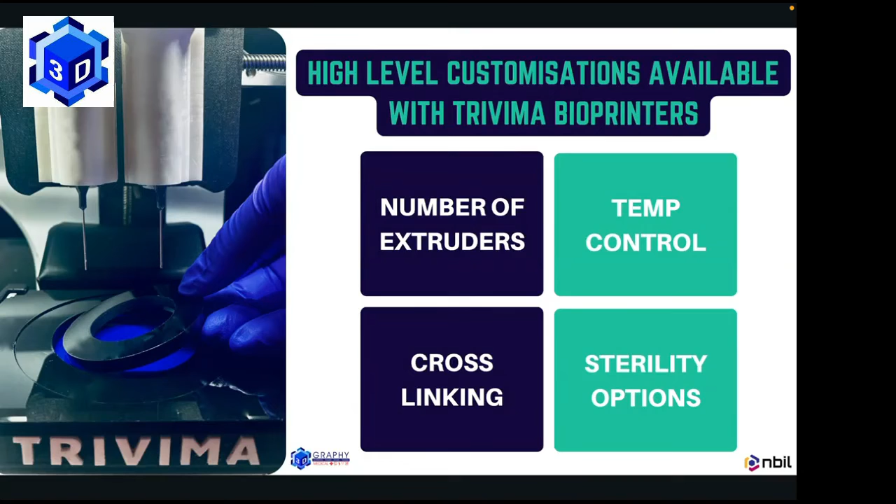You would need different cell types to be printed. The other one is temperature control, where we go into cryo temperature control, as well as up to close to around 125 degrees centigrade on the extruder head. And then we also build in the sterility options within the printers.

There are different ways, obviously there is more micro level of customization that we do. But one interesting project that I want to talk to you about is with Merck. So in 2018, we got to be a part of the Merck Accelerator program, and as part of the Accelerator program, we got to discuss with multiple teams within Merck to understand how the technology can be utilized within Merck, and how Merck as such is looking at the technology, up and coming technology at that point of time, like 3D bioprinting. And we got a project.

The first goal of the project was to print these drops. Basically, we had to print close to around 10 microliter or a 15 microliter droplet, specifically just put a drop in the middle of every well. This is a 96 well plate. We also had to do it for 384 well plates.

We achieved this with Merck, and this was used for tumor modeling studies, where they would create these mini tumor models, and they would basically run different drugs on them to understand how the drug is specifically affecting them. Then they said, okay, you know what?

We want to do something called co-culture studies, where we need you guys to print one drop, like you can see the blue drop over here, and then we need another drop on top of that, which is a totally different biomaterial. We were able to achieve that as well. That took some crazy engineering, and that's what led to our first patent, which was the anti-backlash system for specific movement control within the system.

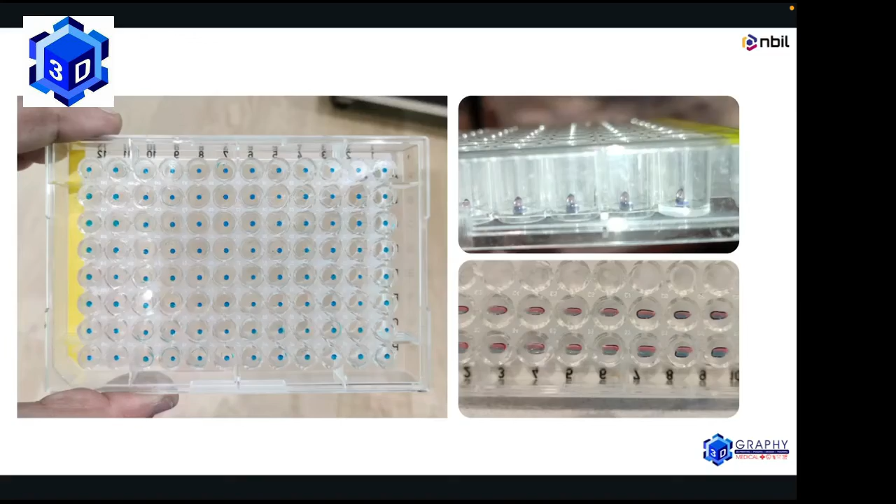So we've worked with a plethora of biomaterials, right from a mixture of synthetic and natural polymers. This is a PCL and gelatin, which was printed in various hexagonal structures of different layer heights, and they basically wanted to understand how breast cancer cells behave in different environments and how they interact with the normal cells as well.

And then another interesting one that we did was a bioceramic one, where one researcher in Bangalore had given us a beta TCP and HA slurry and asked us to print it. We were able to actually print it. It took a lot of R&D, but that led to our second patent, where we were able to develop a precise temperature control system for the extruder, and that allowed us to actually print the bioceramic in question.

So we have also printed with light-based biopolymers to create these cylindrical structures as well, and we also go highly intricate because of the anti-backlash system. Our patent that we have developed, we are able to actually go very complex in terms of the structures that we are able to print.

So Dr. Bellari was also mentioning about gradient scaffold structures. So these are something that we tested out our machines with in 2018 itself, and for us it was a good sort of validation of the technology.

With Trivima, obviously we work in a 360-degree format because, like I said, customization is one thing, but support is also going to be critical, and that's why we try to see how technically we can support researchers and clinicians who want to work in the space of bioprinting.

Along the way, we've had some key technology partners. We've had Autodesk that provided us with all the software, and then we've had Microsoft. Microsoft has been a very key partner for us since August 2021. We have developed an AI-based bioprinting platform with Microsoft.

So basically, what we are currently doing with Microsoft is we are taking different scaffolds and classifying them into good, great, and bad - under extruded, optimally extruded, as well as over extruded. Based on this, we were classifying these scaffolds, so the printer will be able to think by itself.

This has very good translation towards the clinical side of things, where you're looking at developing scaffolds that are more uniform in nature, and that's what we are trying to achieve with Microsoft. We are going more crazy with the algorithms, and we feel over a period of time that's going to improve. We've just started on the project, but we have got very good traction over the past 8 to 9 months with Microsoft.

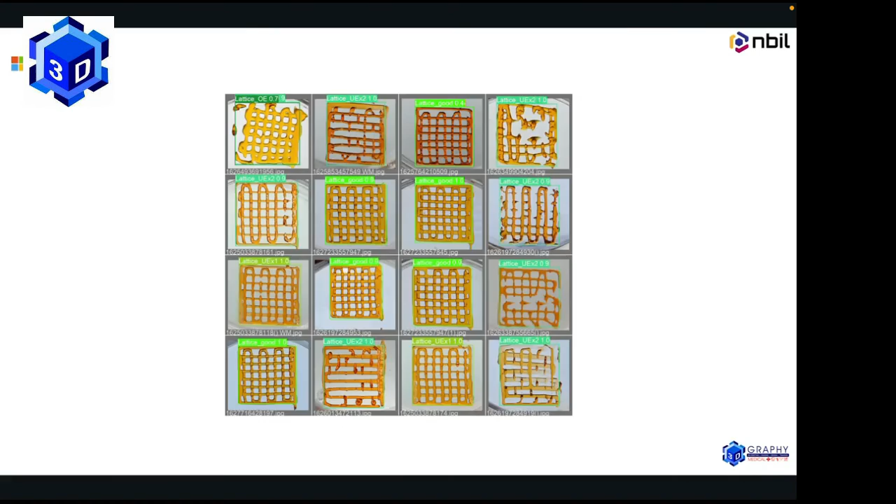So with that, I'll end my slide with this. We at NBIL look at ourselves as a platform company. The team, technology, process, patents - all of these form the basis of who we are.

Trivima, Next Big Learning, and InnoSkin are already products that are in the market, but we also collaborate and consult for researchers and clinicians who want to get into the field of bioprinting. And we always want to see how we can develop novel, customized technology solutions for both academic researchers as well as clinicians who are interested to develop novel solutions.

So with that, I'll end my slide here. Shibu, I think if I'll take any questions if required.

Thank you, Piyush. Again, from the orthopedic point of view, because this is predominantly orthopedics, we were predominantly interested more into the soft tissue bioprinting that you can do or think ahead. As I was mentioning yesterday, for the cartilage as well as for the soft tissues, predominantly the muscles and the collagen, and ligaments.

So I think somewhere if you can also think with the type of work that Dr. Jayesh is doing, where he is using nanotechnology and biomaterials, I think you can also think in terms of having those technological biomaterials.